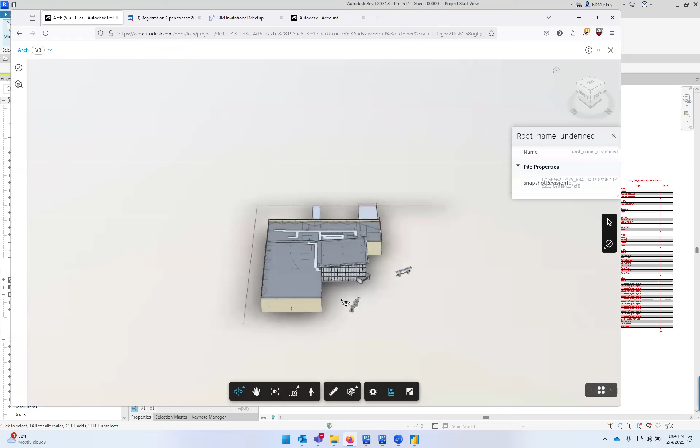If you're in ACC, you can do this. It works really well. You can still see this data exchange model just like any one of your Revit files. But basically what that's doing is parsing that data exchange model down into data, not native Revit content. You can select on it. You can still get the properties. You're going to see all of the properties are still going to be there, etc. But it is a lot more dumbed down version of it.

And the whole reason for this data exchange model is you'll be able to have other people start linking to this. Like theoretically, if you've got the Rhino add-in, Rhino can go in and start looking at certain data from the data exchange model, do what it needs to do and update it. The other thing is that if you do have this data exchange model, there is then a Power BI add-in as well.

So you have to go, I believe, to the Autodesk App Store to get this, but you'll see I have a data exchange tool in my Collaborate tab. All this does is you point to a file, you say generate data exchange model, and it does generate that data exchange model up on the cloud, which I was just showing here, right? So I've done it for two separate buildings. I gave a description so people would understand online what the heck is this just Arch file and this Arch Events file. These are your data exchange.

But you can also then go download a Power BI add-in, and that Power BI will let you link directly into that. So if I go into my get data, it doesn't show up here, but if I say more, I can actually get data from, oh, I got to remember what this was. I did this a while ago. There is like an Autodesk access tool, and you can actually go get it from there. So I got to go to other, I believe. And then in the other, there's your Autodesk data connector for Power BI. So it does allow that. So this is getting directly connected to that.

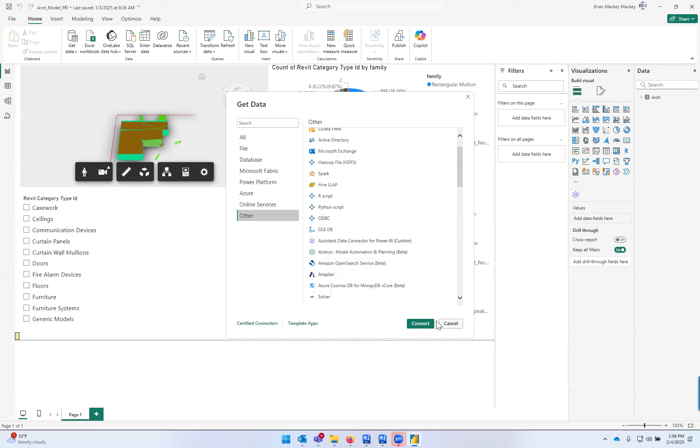So I've used Power BI with Revit stuff in the past. It's usually we're exporting out to some sort of Excel data or whatever. This will actually live link from Autodesk, the Autodesk Construction Cloud. You can kind of see that with the little tip, you've got the little Power BI viewer. I literally spent no time in this. I can click on the casework. It'll zoom me in and show me all the different types of casework, et cetera, we've got going on inside of there. So I'm not going to really get into this, but I did want people to know that this stuff is there.

Autodesk is trying to work on the data exchange models as they keep talking about. And I know they're going to be pushing that even harder in 26 when that does come out. So if this is something you guys are interested in, do go play with Power BI on the Autodesk data exchange models and add-ons, and you'll be able to quickly set some of that up. And again, there's also a Rhino data exchange. If you're using Rhino a lot, there's something to hook up into the Autodesk data exchange as well.

And it looks like Rick also put up there, speaking of Rhino, there is also a content catalog. So if any of you guys are using the content catalog, formerly known as, oh shoot, I just drew blank. I can see all the people's faces. UNIFI, thank you guys. Formerly known as UNIFI, they do actually have a Rhino add-in for that as well. It's still missing a lot of what we had from UNIFI, but they are working to make improvements. So hopefully that'll be sitting in there.

So I think I might have to show something else since we literally only see one question in there. I'll show something I was playing with the other day, which failed miserably, by the way. I have a client and they have all these different profiles to do their curtain wall mullions architecturally. They had one that was just a rectangle, one that had a reveal on the right, one that had a reveal on the left. So they literally kept loading in 3 or 4 different profiles. My theory is, hey, could we have one profile that would do that?

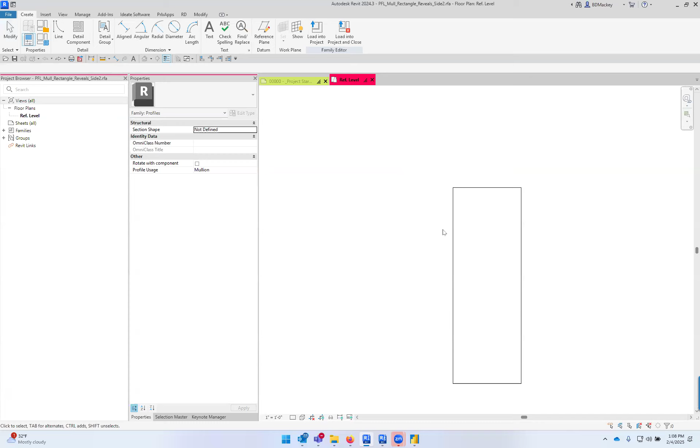So you can kind of see if you start looking inside of here, obviously that's the pretty simple version. But if I came in here and said I wanted that reveal to be 0, I can make the reveal go 0 and it still works. I'm not getting the element is too small on screen. Because technically what I'm doing is I'm drawing 3 separate lines. I've got one really short line there, I've got the line here, and then I've got the overall big line here. I got that for the other side as well.

So if I go into my visibility graphics to just look at this, and again, I don't know if this was a good idea. Well, at the end, I found out it was a bad idea. I don't know if it was a good idea beforehand or not. But when I started going here and doing this, it's getting into just a lot of, hey, when it's 0, I need to make this line come back over to here. But then I also need to make this line up as well, right? So I'm just technically shifting all of those lines over to see what I wanted to do. And again, I'm basically just doing that with formulas.

So if I come out here and look, I'll cancel out of this, I have 2 reference planes on top of each other, right? I can come down here, I got 2 reference planes. One is going to be the reveal reference plane. And then the other reference plane I have is going to be the one that's for the physical right side. So if I come back here and I just say there's going to be a reveal distance here, I change that value, cool, that's what's going to be there. But then the same thing is happening over here. You'll notice right now there's two reference planes on top of each other there. And when I undo that, you can see them.

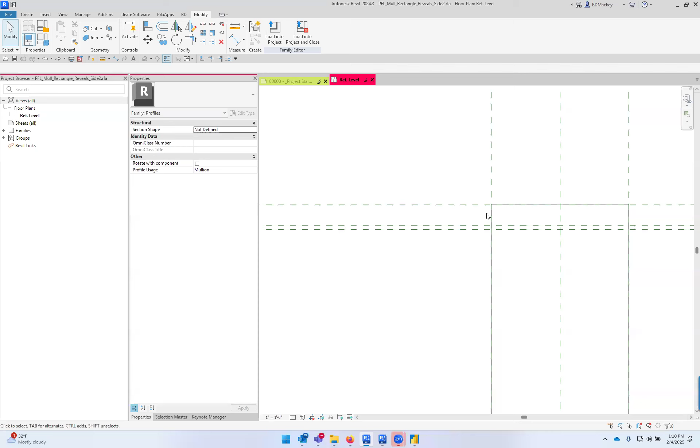So basically what I have is just a conditional statement saying, hey, when this comes over to 0, take these 2 reference planes and shift them a slight distance from each other. Otherwise, if it has a value, let's go ahead and put those on top of each other, right? So technically this line here isn't constrained to this reference plane. This line here, if I were to delete it, wasn't constrained. It's the endpoint of this line that's constrained and the endpoint of this line that's constrained. The other line I have just connects those 2 together.

So you'll see inside of here, like I said, just a whole bunch of conditional statements that's basically saying, cool, if the reveal depth equals 0, make this 1/32 of an inch. So make the gap between here 1/32 of an inch, right? So if I come back up here and make that reveal 0, you'll see that I make this 1/32 of an inch, which is actually plus the reveal depth. So it's reveal depth plus that. So it's basically just giving me 1/32 of an inch, and then this one just shifts over.

If I go change this to be reveal depth plus 1/8 or something like that, then what you'll see is that line. Oh, I got to go make this a value again. Sorry. You'll see that that line is technically just at an angle. So all I'm doing is just making that line go straight, which I thought was brilliant. And it's like, God, this is so cool. But the problem is in Revit, when I loaded this in, I saw a hard-coded face line at all of these. So I did this as my curtain wall mullion.

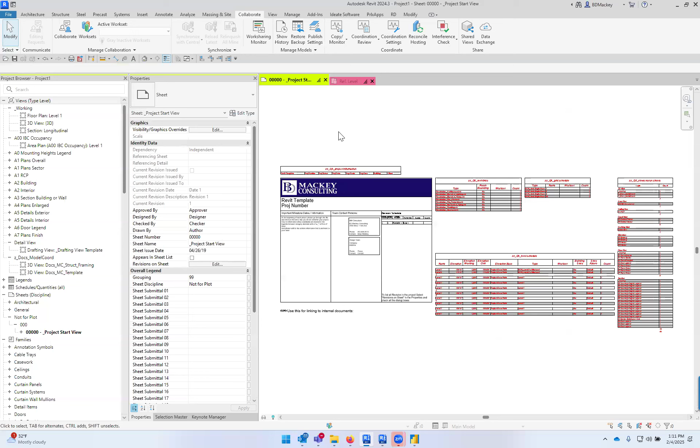I don't think I loaded this into my template. So I'm gonna go ahead and load this into my template and just show you. I'll go to a 3D view.

You also can see that I'm buying time for more questions. We only have a couple of questions here.

But if I come in here and grab this mullion, I'm going to go edit the type, and I'm going to go grab the mullion that says reveals, right? So we'll see what's going to happen. I might have totally broke it. I'll delete them all. Why can't you put them in there? It's not a corner one. Let's just go create a new mullion. I threw this into a client thing. I did not do it into my own yet. So this totally is not curtain wall mullions.

Rectangle. Let me just duplicate this. Cool. R, so I know which one I'm working on. And if I say, cool, this one wants to be the snap cap, the reveal side one. All right, so now I've got an RRR. So if I were to come in here and just grab this one, unpin it, and switch it to be a new one that uses that profile, duplicate, cool. I'll tell this to use. Oh, I already did that. Never mind.

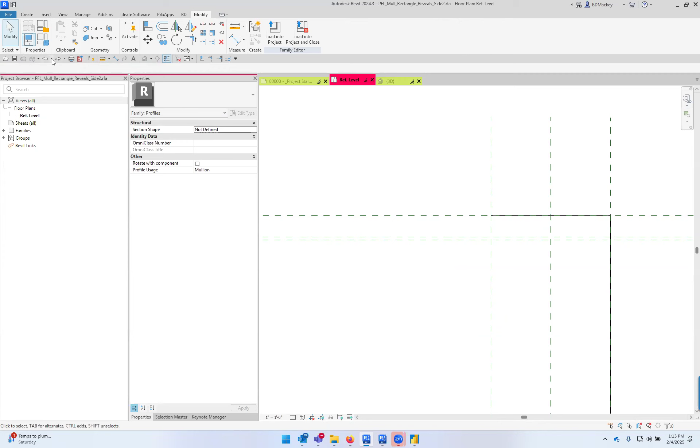Wow, it's broken in my profile. I literally just used this yesterday. Yeah, I'm done with doors. Profiles. R. Maybe I should have undone all of this and reloaded it in because I broke it so many times. Let me just come in here and undo everything. Load that into my project.

Profile mullion, rectangle, side 2. And close this view, go back to my 3D view. We'll grab that. Did I tell it to actually use the right profile? And yeah, it's a good thing this is such a straightforward process, right? Super easy. There's only like one place to check.

Yeah, I love things like this in Revit where this family's nested into that family, which is nested into that family. Yeah. There we go. I have no idea what I did. So this is all fine and dandy. Like this is cool. I got the reveals like I wanted to for this particular client.

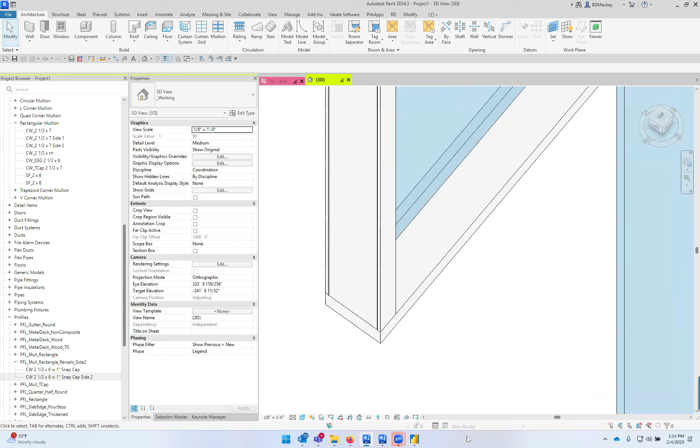But if I go back into that profile and I go down to that profile, I think I said use this one. If I change that value to be 0, it should theoretically work and not break on me. But you'll see that Revit sees all of those faces. So I had the one with a reveal on either side, and I just made it rectangular. And I brought it in, and it added all of these lines all over the place. So even though it's one flat surface, Revit's still giving me the hard-coded line between all of those surfaces. So unfortunately, my idea didn't work.

But I did bring it up because if you did want to do that, I'm sure if I put that profile and I used it like on a handrail, it would probably show as a rectangle. I don't think on a lot of the other profiles where we would sweep that, I would see all of those different faces.

The other thought it did give me too, though, is if you really wanted to bring a profile in and have different materials on those, oops, Control Y, not this, I could then probably have different materials on that profile if I really wanted to. Since they're different surfaces, it might give you another option. Not at all what I was going for, but just the capability.

So what I was trying to do on that is just let my client know that, look, you can have one profile do multiple things. In this particular case, it failed miserably.

All right, we'll have questions. If you guys don't ask any more questions, we're just gonna have to sit here and watch me fumble on finding all the properties for all the mullions in the 12 locations they are. So what have we got going on? Well, there was some chat about iRevit getting updated. Yeah, I started with that. That's true. Sorry.

Michael asked, can you put them 1/128th of an inch apart? No, because then in Revit, I'd get something that was smaller than a 32nd of an inch and it would blow up. So I do have that at a 32nd of an inch, and I could have had this one come over a 32nd of an inch. It had 3 lines on the edge. Regardless, I think it just failed miserably because it's got to be there. So a little frustrating.

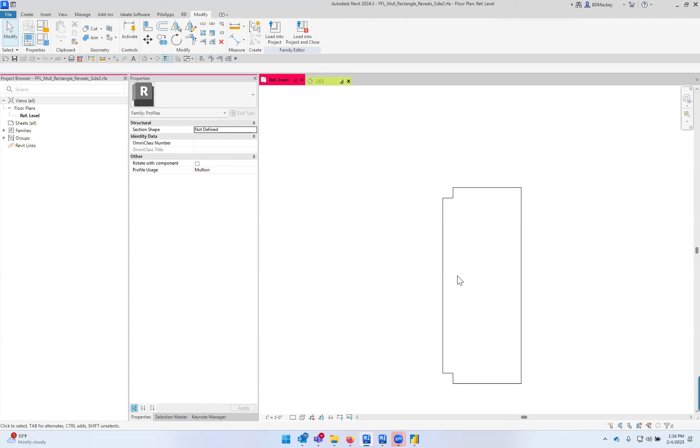So if that was something you wanted, I think John actually made it look like the maze from The Shining and loaded that into a mullion. And he had every mullion look like the Shining maze. So just one of those things that it is possible. Not the thing I went for, but there you go.

So no, Michael, I don't think making that 1/128th of an inch would work. Yes, you have three edges on top of each other, but Revit needs that profile line segment to be at least 1/32 of an inch.

Rick's asking if I played with the new feature for the mullion profiles. No, I haven't. I don't know if I ever will. I don't think I need to add 5,000 different faces on my project just to get that look.

Way back when, if anybody used the out of the box old mullion profile or old mullions in one of the templates, the mullions that they created actually nested a detail component into that profile. So the profile had the profile lines. I don't know, do they still have that profile, I wonder, in the out of the box content? Let's go to profiles and find out.

Probably. Do they ever get rid of anything in there? Well, they did the doors when they did the doors a while ago. Let's say profiles,

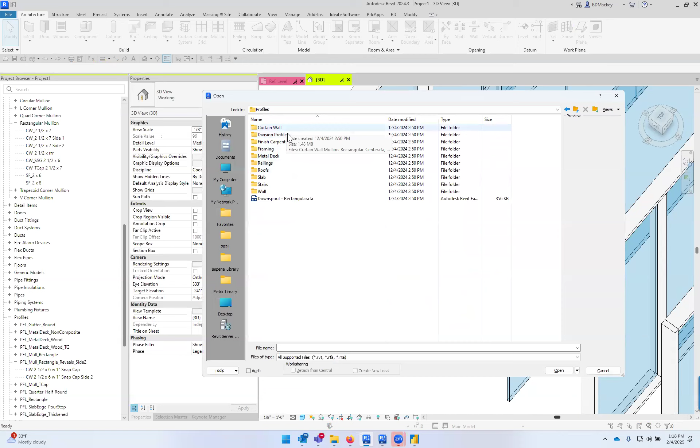curtain wall mullion. Yeah. So in these ones, if you actually open up theirs, they nested in the detail components. So this is a detail component nested on top of just the profile lines. That nested detail component will show through. It's not shared or anything. It's just a detail component that's loaded into it.

Granted, I'm talking probably 10, 15 years ago, but I had a client who loved this. And so they did this. And then when they loaded it into their project, they noticed their project was massively slower, right? Because if I add a horizontal grid segment to this wall, I don't end up with one mullion, I end up with two mullions here. This is not one continuous bottom mullion. Between every grid segment, there is a new mullion.

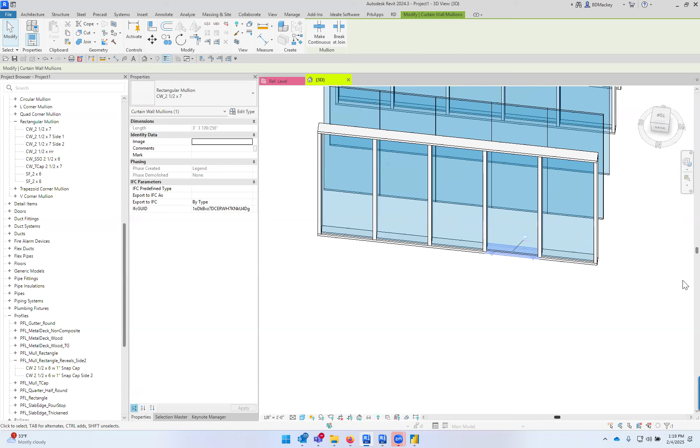So now that detail component is in not once, but one, two, three, four, five times at the top, five times at the bottom, and then however many vertical segments you have. The other thing with the detail component, it looks like somebody posted that, is you do have to be perpendicular to it. So if your profile was rotated or you're doing a slanting wall, the detail component nesting kind of didn't work.

So for me, I never did that because, like I said, I had a client do it and we did a mullion calculation. They had like 9,000 mullions. So you're putting that detail component in 9,000 times. Where are we seeing it? And he showed me the 10 views he saw it in.

I'm like, take that detail component and put it in the 10 damn views where you want to see it. Because you're not seeing it at an 1/8 inch scale floor plan. You're not seeing it at a freaking 1/4 inch scale floor plan. You're only seeing it when you get into like 3/4 of an inch where you're detailing. So I will have that same theory on the curtain wall mullions. I'm probably never going to get into that.

Plus, in my mind, I'm not a fabricator. Getting into that level of detail, the contractor is going to switch me out from Kawneer to somebody else anyway. I don't think I need to be that specific on a curtain wall mullion. I need to give you the gist of it, but I don't think I need to show you the exact extrusions. Maybe you want to, that's up to you guys, but I don't want that overhead in my building for the benefit it doesn't really give us.

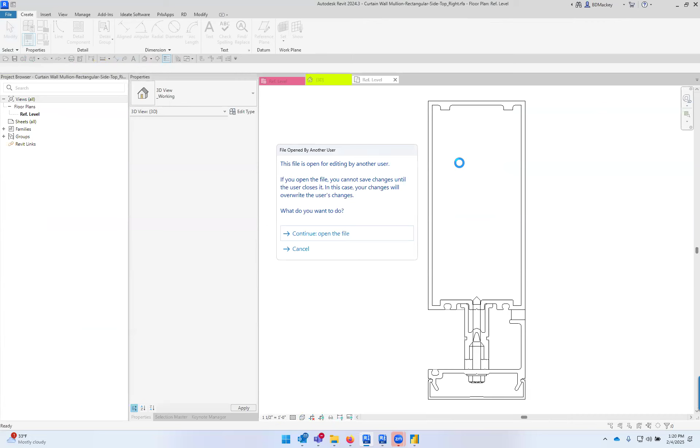Yeah. Somebody said your detail component has to be parametric as well, so you can nest the width and the depth and everything. Absolutely, you'd have to do that as well. And the out of the box one, if I open that one again, literally is. You change the sizes, it all updates. So this whole detail component is 100%. If I say this mullion wanted to be 2.5 by 10.5, it all updates.

It's all there. If I go change the properties, I don't even think they gave you a width property on this, because they didn't want to attempt to figure out all these little things. Depth-wise, that's easy. So yeah, it gets a little bit crazy. But again, my point is now you're seeing it on every floor plan, and are you really gaining anything? Yes, I could turn it on and off by detail level, medium and fine, but it's still there and it's still being used in the Revit workflow.

So no, I haven't messed with the profiles for extrusions. Where I technically really would love that, I would actually love that for handrails. More often than not, I'm cutting through handrail and I want to show that that handrail is an HSS tube or something like that, or my stair channels, I want it to look correct. I would probably use it more there because I'm not doing it so many times rather than getting into all

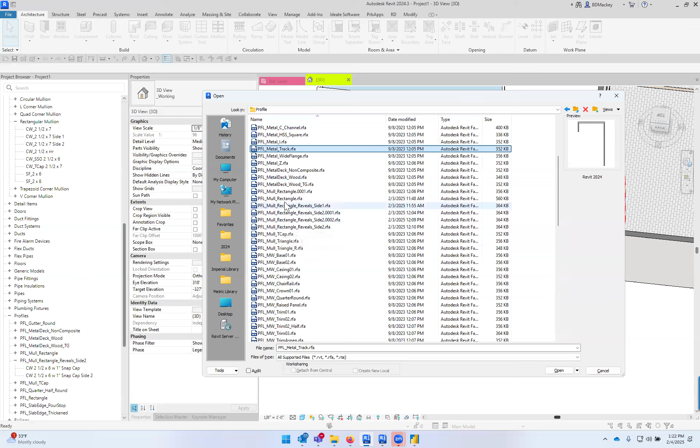of the other things. Like for me, I have a metal profile in here. Where's my metal profile? I don't remember which one it was. HSS, right? So kind of on Michael's question now. So this is my profile where somebody's like, no, I needed to see this extruded out as an HSS. I have a 32nd of an inch, maybe a 64th of an inch gap because there's not a line here that I use on handrails.

So yeah, if you look up underneath the handrail, you see the seam and the metal. But this client does a lot of industrial handrails and they're like, no, I need to see the HSS as an HSS. So they have two little extra lines in here. It is what it is, but that's what I've had to do.

So I would love to be able to see profiles within profile or double lines within profiles for other things than simply just mullion. So if I could come over here and be like, yes, my railings could have that, I would be super excited about that as well. But unfortunately, in 25, it is only mullions.

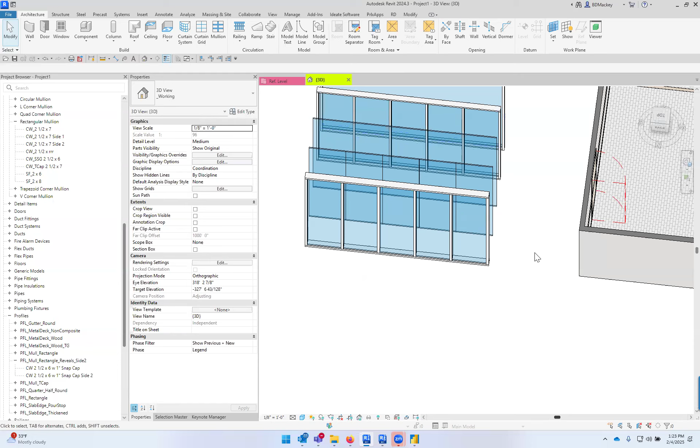Cool. So what questions do we have, Melissa? Looks like we have a couple for doors. So we'll start with Rick. Rick says, how do you set the room calculation point in a door family to be the center of the closed door panel? Is that possible?

I personally do not use the room calculation points on doors. I've used them on other families. I do not use them on doors. And there's a reason why I don't use them on doors, because they truly pick up on the flip. So if you've never noticed it, in a family, you've got this value here called room calculation point. And when you turn that on for a door, it'll give you like a to room and a from room.

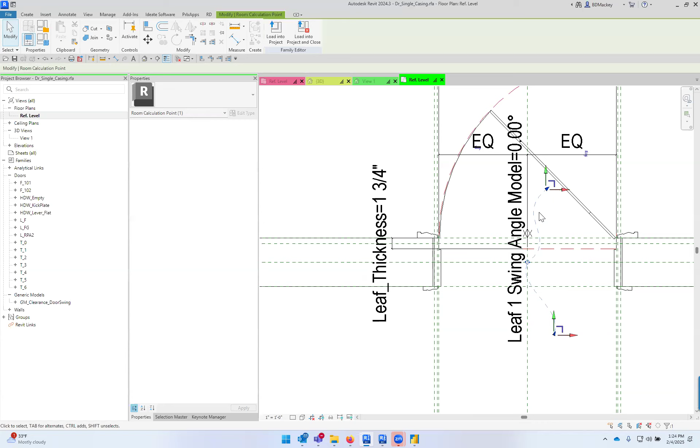So it gives you a squiggle where you've got this squiggle on one side here. This is going to be the from room. And on this side, it's going to be the to room, right? So when you start looking at this, this is what you're going to see inside of this. The reason why I don't use this is if you ever show the to room and from room on a schedule and you wanted to see that data, and you flip that data in a schedule, it will flip the swing of the door on you.

And where I use an example on this is janitor's closets, right? Most of our doors are going to be swinging into the room, but not a janitor's closet. A janitor's closet, we swing that out into the corridor. So if you have a schedule that says my from room or my to room is going to be the corridor into the janitor's closet, and you flip that in the schedule, if you have the room calculation point turned on, it will flip the swing of your door or the hand of your door for you.

So for me, that is not negotiable at all. I do not do that. I do not use this room calculation point. Somebody asked, can you get it to the center of the door when it's closed? I think technically it has to be on the outside side of the host. Because if you try doing it when the door was closed, that's technically going to be within your wall, and Revit's not going to see that as a calculation or a room that you can get into.

So yeah, I don't know if you'd be able to do that because now technically you're within your host. So I could be incorrect in that because, like I said, I don't use it. Rick, if you've seen anything other, then you absolutely could do that. But I don't know because again, if it was when the door was closed, then the door is closed within the wall, and Revit's going to see that wall host as the object. I think that value would just be blank. It could be incorrect though.

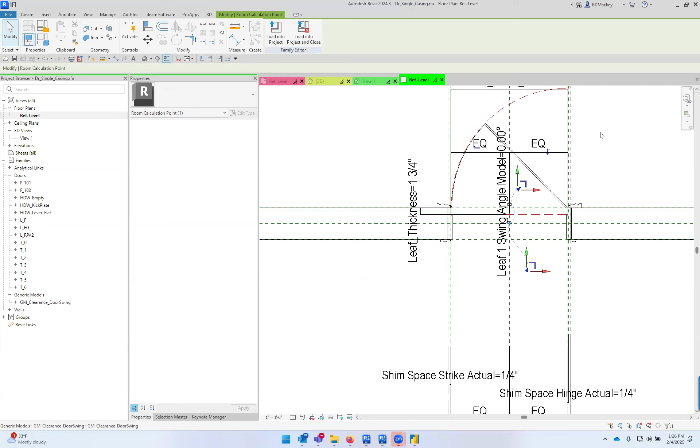It looks like Rick has a follow-up. Oh, I get it, Caitlin. So in a schedule, you're not actually using the room, you're using the door number that says, hey, this is the room it's coming to. Got it. Yeah. So again, that's a schedule that's going through, but you're obviously probably not using the from room to room or the room calculation point, as it's called.

No, I've absolutely used this. I recently had a client, they created a trash enclosure that's nested into the wall, but it kept scheduling it as the room it was in, not the corridor or whatever it was. So we just toggled on the room calculation point, dragged that in front of it, and set it up that way. And that way they were able to say, cool, it's always going to be on the front side of this trash enclosure. So yes, it works great in scenarios like that.

The other thing that I don't know if a lot of people know, and I've got to remember where I have this family, is technically Revit actually looks... no, it's not this one. I don't think it's this one. No, it is this one. So Revit technically looks for the room calculation point. If you don't have the room calculation point turned on, and Revit's looking at what room this element is put into, Revit is looking at the insertion point.

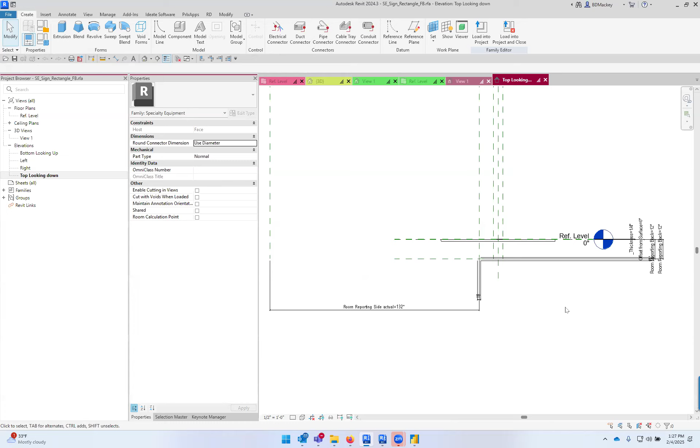So what's great about that is if you have a face-based family, it is always going to host on the face of the object. In this case, this is face-based, but if you have a wall-based one, it's going to look at the wall as the host. But what you can do is move the insertion point that defines origin around. So for me, I have this face-based family. I put it on there, it's going to go on the face of the wall. But then I have instance-based values to move the insertion point left, right, and back wherever I want.

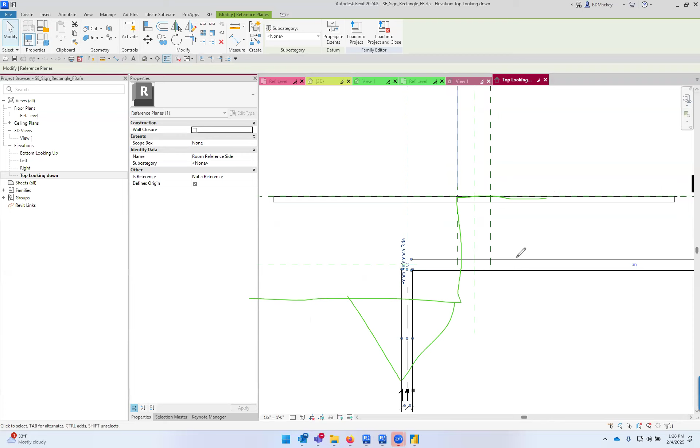Because in this case, like for signage, I might be looking at, hey, this is a corridor, the door's here and it's coming down like this, and the door's over here. Here's my door swing, and I want it to pick up on this room back here. If I did a room calculation point, I'd have to have that dragged, and you can't adjust that in the project environment. So I can move my little reference planes around in plan and get those where I want them to be. And the sign will then say, cool, whatever room this insertion point is set to, it will use that.

So yes, I have a face-based family where I can come in here and move the insertion point around. I put it on the wall, I've got instance-based properties, I drag this around, and now I can move that to where I want it to be. I'm not using the room calculation point because that's static and we can't move it. That's the other reason I don't often use that tool: in this case, I want it back 4 feet, in this case back 2 feet, in this case on the other side. I can do all of that with this scenario.

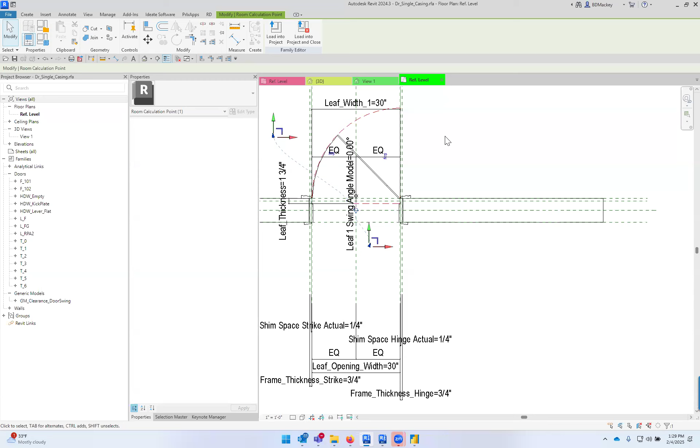Yeah. I was waiting for someone to say that, Sarah. AutoCAD Architecture had this room calculation point, but once you loaded the project, you could just drag it around. It gave you a little grip to drag it wherever you wanted. That was the theory when Autodesk gave us this, because everybody from AutoCAD Architecture was complaining that this is stupid. So they gave us this, and you can move it around as much as you want here, but damn it, I want this grip in the project environment. If Autodesk would give me that, I would use that tool more often. So it's very frustrating. That's fair.

So Rick, I don't think so.

Hopefully that would get you that. Oh no, he followed up. What's Rick's follow-up on that? Follow-up is trying to get the room to go into the door jamb and opening for finish floors. Is there another way? There's no way to... Oh, you want the room to go into the jamb?

Yeah, no, there's not going to be, to my knowledge, a way to get the room to go in and calculate that extra square footage or whatever you're looking for, because doors are not a room-based object. So you're not going to be able to get the room to come into here to see what you're looking for. What I have done, my tile wall is going through here. I don't know why, but let's just delete that wall real quick.

So for me and my doors to kind of help you for finished floors, my finished floor here, if you look at my doors, or if I go edit the sketch of my finished floor, it does go to the center line of that door. I just simply built into my door family a reference plane. And you'll see if I kind of grab the line here. I built a reference plane in there that I call my floor material transition. So when I'm trying to sketch this up, I can align it to that reference plane that goes to the center of the door, right?

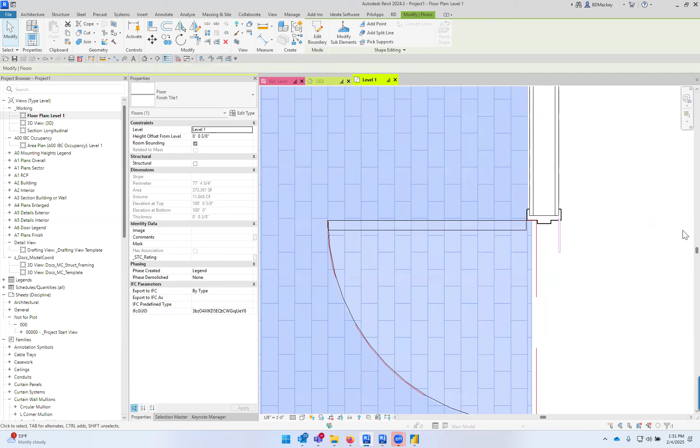So again, if I edit this door family and I go look at the door family here, and I go into my floor plan view, I literally just have a reference plane centered on the door. I labeled it, made it a weak reference, and it's called my floor material transition. There is literally just a dimension for leaf thickness half that goes from where the front of the leaf would go back here, and now I have that for setting it up. So it's the best solution I have for you, Rick, to have a place to snap your finished floors to.

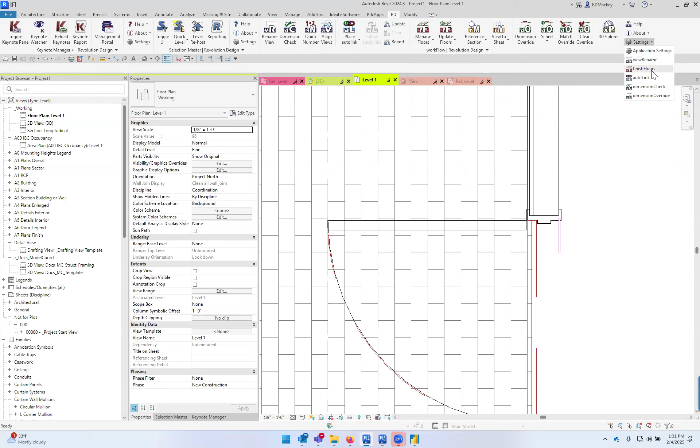I will say that in the project environment, Revolution Design does have in their Manage Floors, so you can actually create floors based off of the room. When you do that, there is a setting for the finished floors, and I got to remember where this is. I haven't looked lately. Oh, it's the pictures at the bottom. So you can have it extend into the face of the frame, so it will pick up theoretically on what's going like this.

So ignore the whole door, which is what Autodesk would do. Go to the face of the frame or try to notch it into the center of the frame. It does go to center of frame, not center of where your leaf type is. So not exactly perfect, but definitely better off than what you would get just trying to do floor by the room itself. So they do have this. If you are using the Revolution Design tools, they'll go through and do that.

I have had a long time request from Autodesk. I don't know if you guys have ever done this, but if you select a reference plane, there is a tick box for reference planes to be what's called a wall closure. And the wall closure tick box, if I go change my values to have something, it's up here. I'll make these 2 inches. So this here has a tick box for wall closure, right? What this actually allows us to do is any material within that wall that has a wrap built into it will wrap around to a reference plane that has the wall closure ticked.

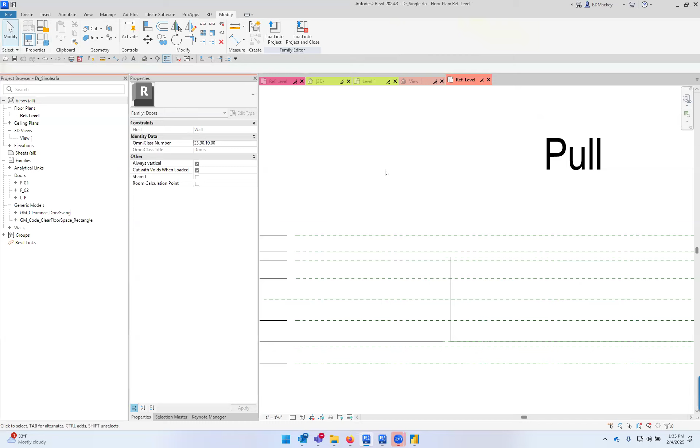I would love to have one that's called floor closure. So I could grab this one here, have a floor closure tick over here, and then my finished floor would go into the opening like that, right? So again, that wall closure, if I come back over here, and I think I got an inset door over here. No, it's not. We'll switch it to be an inset door. Sure, that'll work. Right, and then if I go change my inset here, you can see that I've got this finished material here.

If I go into this door, I can go into the door and say, cool, where is it? For the wall closure, do you want it to pick up on what the host is telling it to do, or do you want it to come on the interior or the exterior?

So if I were to come in here and change that material return to be 2 inches, not 2 feet, 2 inches and 2 inches here, and now when I go into this wall type and say, at the wraps here, I can allow this and this to wrap, then it'll wrap to that wall closure checkbox. So I can get those materials to wrap into that wall closure when I go in and set it up.

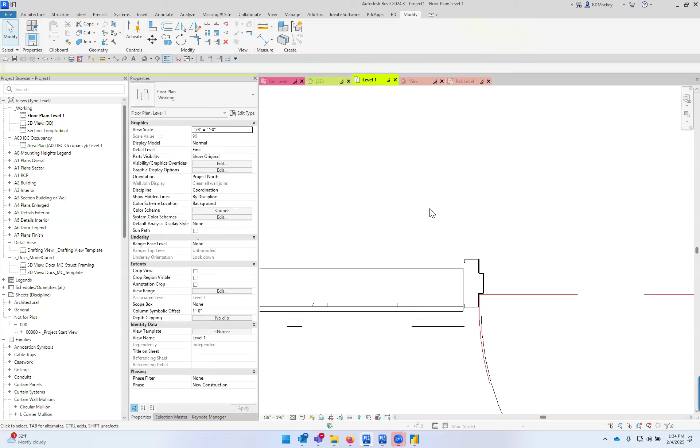So you do have that in your doors for your little wraps. I know those wraps are fake and they're not real, but if somebody does want to see it, you have that as well. So I just wish we had a floor closure checkbox. That would be great. Yeah, roadmap.

So at the very least, build in a reference plane that's called floor transition. Your users can at least snap to where you want that floor transition to go to. That's all I got. I didn't align and lock mine to it. I guess I could have aligned and locked that finished floor to it, but see if I aligned it to my, see, and I always make sure I'm saying it because there's so many reference planes in everything now.

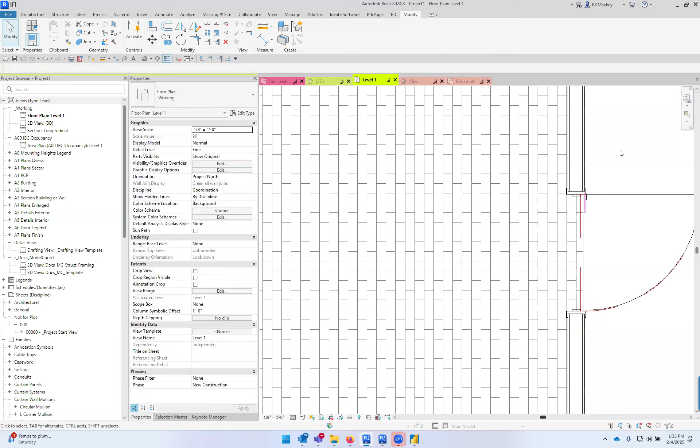Floor material transition, if I align and lock that, I don't do the alignment and lock, finish that. If I flip, no, don't attach. If I flip my door, does the material go to? Yeah, so you could even do that. And if the door flips, woo, your material will go with it. So that's all I got for you.

No way to actually get that to work inside of there. Trying to figure out where that's going to come back and bite you in the ass. The align and lock, yeah, I would never do that. Yeah. Like, who is that going to just totally have pulling their hair out?

That's okay. One of my clients who does more industrial type work, they know that all of their buildings have a concrete curb, right? So almost all of their walls are built up on a concrete curb. There's usually a 6 inch tall concrete curb wall here. But then the concrete gets poured over it. So whenever there's a door, we need to have the void go down 5 inches into the wall that comes up. So we've got to rebuild their doors to have a void built into it to also cut the wall below. So that one's going to be fun to go in and do too.

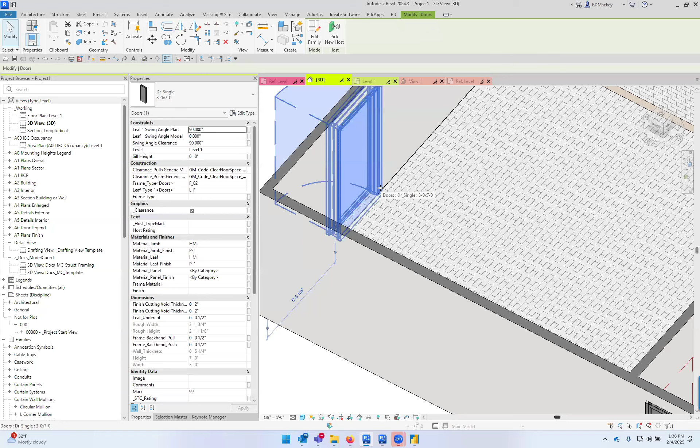So cool. Good times. Oh, so Rick's saying BIM 42 as a finished floor tool does the same thing. One thing about the Revolution Design tool as well is if your room changes or your walls change, this is going to be static. Like if I move my door, that transition is going to be static, unless I aligned and locked it to the edge. I must have actually aligned it to the sides as well. But if you didn't do that, then it's not going to update.

But the update floors basically says, cool, update the floor. It'll see that the rooms have changed. It'll go through and do it all because it is using the rooms, so all of these lines are static. I used pick walls for all of my lines. So if I move the wall, it's all going to be just fine. Oh, I didn't use pick lines. But again, if I use Revolution Design Tool here and there's a room, then I could just say, go update the floors and it would make that match.

That's hilarious. That's where it's going to bite me, Melissa. I am. Already figured it out for you. Perfect. That's funny.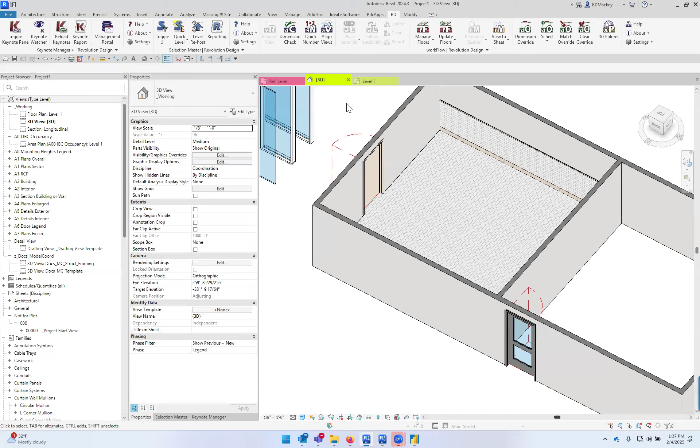All right. Oh, here's a graphic door and window schedule question. You walk through your method to do graphic door and window schedules not using legends. Do you do this for wall types as well? So the way my doors are built, I physically cannot do a legend component.

I found out when I created my doors a long time ago, not because I was using it, because I hate legend components, but if you have a family that has the tick box for work plane based, and you load that into Revit and try to use it as a legend component, it does not understand what the hell is going on. So if I open up a legend, I'm going to come in here, go to annotate, and do a legend component.

And I'm going to go choose one of my doors. It'll be one of my L's. Past the casework, since we've got this beautiful, you can actually do, I do a leaf type, right? So leaf type's coming in here and it's on a floor plan. I'm like, cool, I want to see the front elevation. Nope. If it is work plane based, the front and the back, it doesn't even give you left or right. You only get front and back.

And then for whatever reason, it sees it incorrectly. I have found that PyRevit, which I don't have installed, does have a thing to say, no, let me force all the legend components to look at a particular view. It will fix that. But the way my doors are built, even though the front and the back is correct, since it's ticked on work plane based, and I've tried this with other families that are the same way, it just freaks out and doesn't give you all the options.

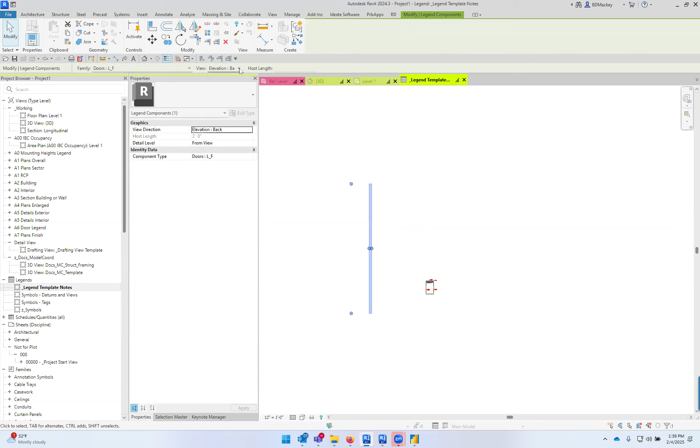Right. So I can't even come in and be like, no, I want to change it after the fact. It is just not there. So I can't do that with those components. So for me, and I know there's different ways of doing this. Some of my clients do a design option, some of them do a work set, some of them do whatever. I have my stuff on a phase.

So if you go in here, you're going to see that all of this stuff, if I select it, is on a phase called the legend phase. So I've literally created all of this stuff in my template on the legend phase. If I go say I want to go see show new, all of that stuff over here goes away, with the exception of that detail component, right? So if I say I'm on a legend phase, that's what happens here.

So I've created a legend phase. I have other clients call it annotation. I've had clients do this as a design option, and they do it that way. I personally do it on a phase because A, I can have it in template, and B, then it doesn't necessarily see these walls for room bounding elements because it's on a phase after any phase I do.

I also have that phase for me at the very end. So my legend phase is the last phase. I have other clients like, no, no, no, I do it as the first phase. Doesn't matter, whatever you want to do. But then what I've got done is I literally have placed all of these crazy doors, not only for me to have a record of it, but more because that's how my legends are created.

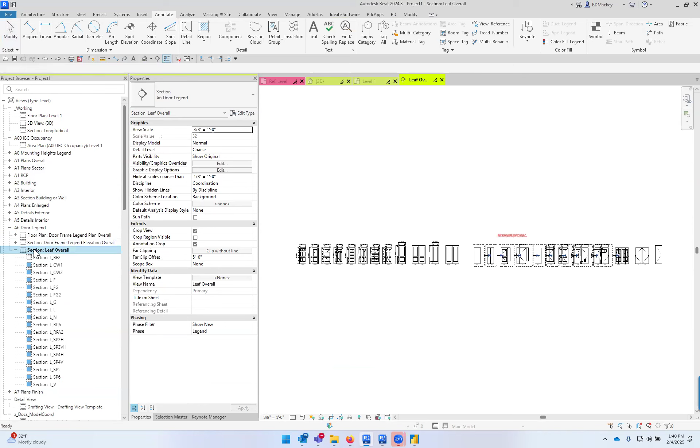So if I come down here to my door legends, you're going to see I've got a floor plan for the frames. I've got a floor plan for the leaves. And then within, sorry, it's an elevation, in this case a section for the leaves. And within that, I have all dependent views. So I did one overall view, then I did all of these dependent views for each leaf.

The reason why I do that is if I go into one of those dependent views, then I have all of the text inside, all the dimensions inside of here, and this is a tag. So this is truly a tag. So if I were to go grab this, and I'm not grabbing this leaf type, you can see I'm grabbing the entire door, right? I can go to that door and be like, oh no, I shouldn't have that leaf type. I should have had this leaf type.

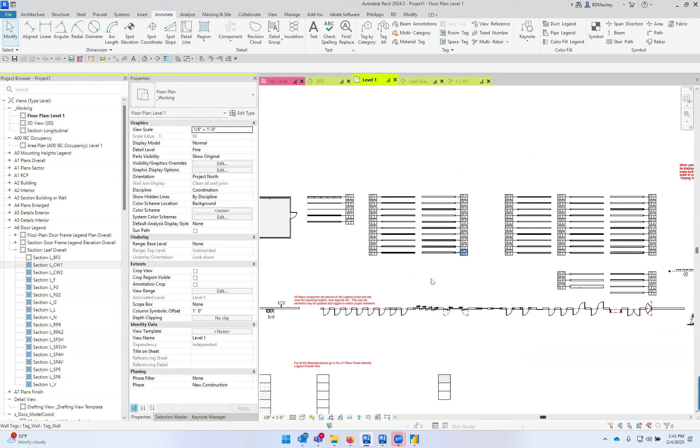That wasn't a leaf type. I'll go to CW2. I go to this leaf type, gonna have to remove a couple dimensions. Then you'll start to see, cool, now I've got this correct tag down here, right? So again, in my overall building, I went through and placed a fake wall, and then I've got all of these different doors inside of here, and then I'm doing views to look at that.

I also went in personally for me, and I did a frame legend because those are the same things. So this is my frame type 40. My frame type 40 is going to allow me to come in here and start saying, cool, I can now throw all of those dimensions on here. And not only do I have a frame legend for the elevation for what is frame 40, I have that same for a plan, because why not do it for a plan, right?

And if I actually go look at the sheet where all of this is, and I open that sheet, I also have a frame schedule, which talks about here's all my frame types. Here's the hinge, the strike, the head thickness in case they happen to be different. Here's the depth of the wall, so the host depth. Here's my actual depth of the frame itself.

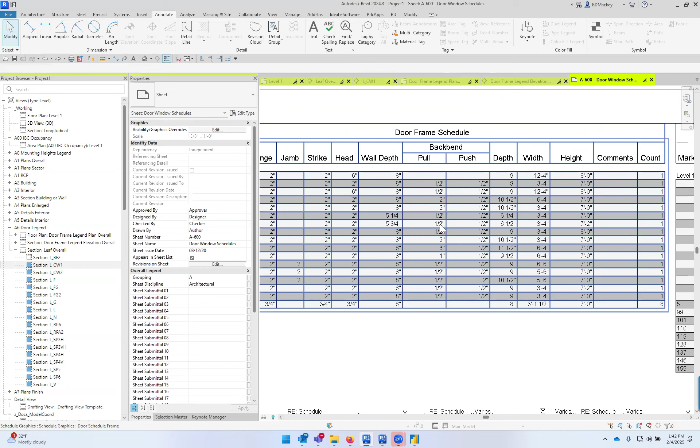And if I have a back bend on those, if the back bends happen to vary, so like in this one door, it's got a 2-inch back bend versus a 1/2 inch on the other side. So I've got all those frame types listed. And then my schedule says, see the back bend values. And I've got back bend values on this. So on my schedule, I put the door schedule with my frame types and my leaf types so you can see how many of all of those there are.

And that's just what I go through and do. So it's all live data. It's all there. There's no legend component. And now I can see, cool, I've got all the properties of this here. So my contractor, my fabricator doesn't have to try to go to every floor plan to see what are the variances of all of this. This is all live data to my doors.

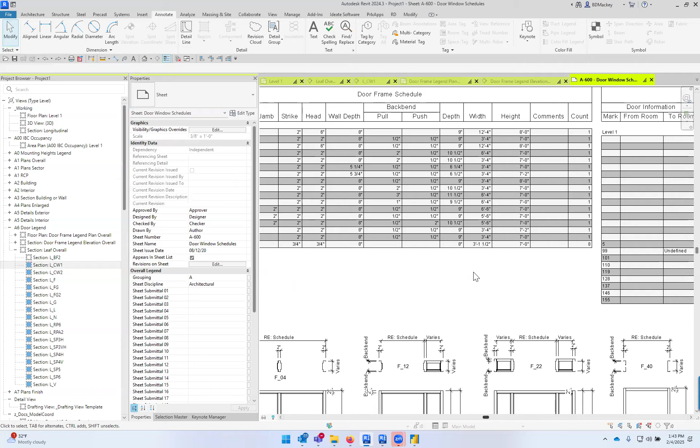So that's my theory. I know you guys do something similar at Parallax. Yep. Our legends are before the project. Yeah, you do a phase before? Yeah, we do a phase before, and there actually is a demo phase just so you can use it for live legends to show overrides and things as well. Yeah. But yeah, they're all floating out on the legends level, pre-construction, I guess.

What is my door family based on since those are all instances? Frame type or just door? So for me, my doors, the types are sizes. And most of these are like just door single. The frame as well as the leaf in all of my doors are instance based. Same thing for all the materials. Those are all instance based. And then even things for like the back bend. So like you can see on this door, there's a 2-inch back bend on this side, right?

I'm actually just playing with this. I literally just added the back bend like last week because I had a client go, well, we always schedule that. I'm like, you're the only client I've ever gotten that schedules what those are. So yes, I just switched. That was built into my door. I just had to make it shared parameters so I could schedule it. Those were all in there. But so all of that stuff is instance.

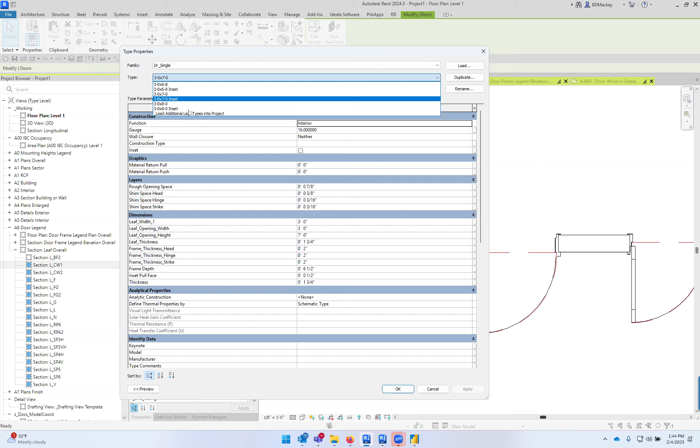What is type based for me is going to be the sizes or like the shim space or the frame sizes. So the size of the frame head and strike, those are all types. So if I have like a 3.0 by 7.0 that's inset and I got one going into like a CMU where I want a 4-inch head versus a 2-inch head, I would duplicate those as I go into those. So those are the types of scenarios I have.

My single door also has a tick box for inset or not. So if I tick it inset in a single door case, then it ignores the wall width and it goes to the frame depth value, and that frame depth just starts going inside of there. So I didn't want to have one door that does this and another door that looks at the other one. That's all one door. All of my door singles are one door single.

I do then have the ones with the side light. So this is a door single with side lights. The 1 versus 2 side lights, those are frame types. So if I switch this one from frame 22 to frame, I think it's 12, then the one side light is going to go away. I got to remove all my dimensions that are dimensioning it. Yes, I know. And now I get to the single side light. So for me, those are part of the frame types.

Same thing for my pocket doors. They're over here. So like my barn door can also be a pocket door. So again, there's just the tick box in the type properties for is this going to be inset? If I say inset, my barn door becomes a pocket door. But I do then have to go back and change the frame type. So I probably on this one should have made that be something different. And that would be like a frame 12, I think.

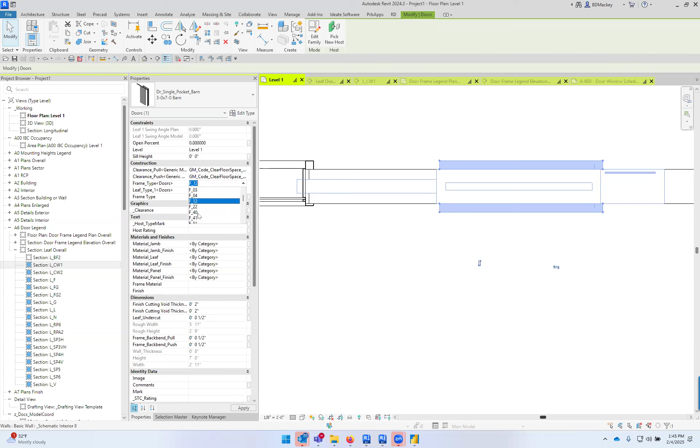Yeah, I shouldn't be doing this in my legend doors. No, not frame 12. Probably frame 40. Yeah. So then there's my frame 40 to show the pocket door.

And then if it's more of a residential type door, we get over to the residential doors. These ones also then have trim types. So you'll see I've got trim types on the pull and the push side. And then my residential doors also have hardware in the pull and push. I just haven't implemented the hardware on the commercial doors yet. So Blacker.

Yeah, when Tom's saying the guys who actually schedule the finishes on the backbends on these doors, it's hilarious to me because I have most architects who don't schedule that, and so many architects have like a chair rail or something out here and it's proud of the door, and like, oh shit, it's an RFI later. This client's like, no, whatever finishes we have, we've got to take that into consideration for every door, and that's why they started scheduling it.

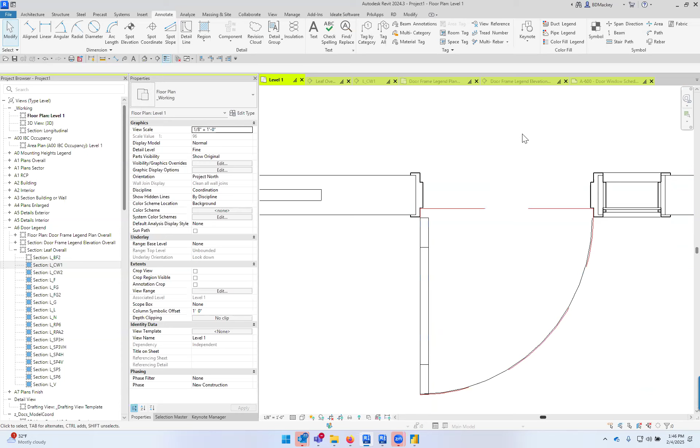I always laugh because when I see architects, most of them have the door head and jamb detail, and they have one detail. I was in a project where there was chair rail going on, a wainscot going up. That one door should have 5 jamb details. What is that jamb detail at the base? How are you returning it? What is it at the panel? What is it at the chair rail? What is it at the fabric panel above? Right. So this one door should have 5 different details. They did not do that, and their job suffered from it.

So this one client is very in tune with the interiors. No, we look at every single finish we put on the inside at every single door, and that's why we're looking at those backbend values.

Nice. So for all of this stuff for the legend phase, I even have all of my mounting heights because then they can be live to something. So all my mounting heights are actual families I've put in there. I think those are on my A7. No, those are on my A0. So again, same thing here. I've got a mounting height overall. All of these are then dependent views, and it has all the dimensions.

And part of the reason why I do this is if you're like, cool, in this project I'm not using this toilet paper dispenser, right? I can find that toilet paper dispenser in my families. So I come down into my families, those are specialty equipment. And I wanted to swap out this toilet paper to something else. That's paper towel, but you get the point. If you do a reload and choose a new one, it will just update all of them in your project. So I don't go load a new one when something changes in a project.

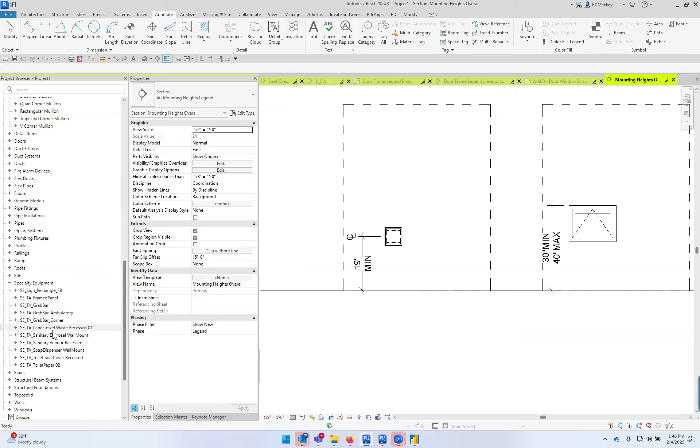I do a reload from, and as long as the family I swap it out with has the same is reference, called is reference centerline elevation, this dimension will stay. As long as this one has the is reference on the reference plane at the top, this dimension will stay. So as I swap all of these out, my dimensions stay, but I'm truly showing the elements I'm using in my project, not some dumb variation of it. So I do that for all of my mounting heights.

They're all live things. And then I do it for turning radiuses and things like that. I think this one even has the handicap clearances, all of those sorts of things. So doors, windows. And then the last thing I have on there is a material legend. These are little generic annotation families, literally just 1/4 inch thick, I think 4 foot by 6 foot or something like that. And those are literally in there for my finishes.

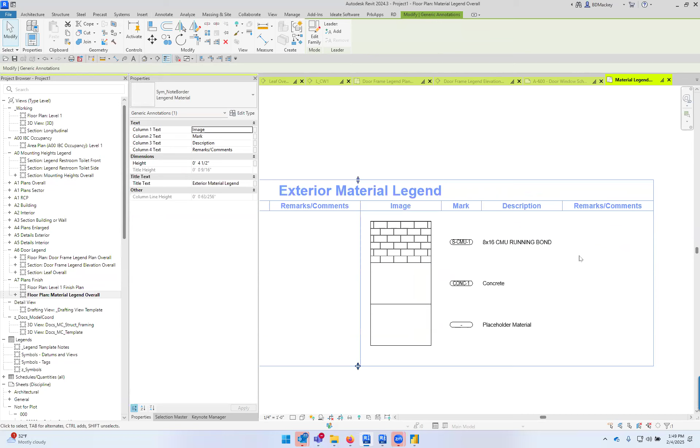Because again, if I come down here to this finish, I model all of these elements, and then this is a tag tagging the material. So this is my material tag tagging this element. It's a little border that lines up with all of this stuff. So if you're like, cool, on my exterior material legend, I wanted to come in here and this needed to be, that's not the button I meant to click.

This needed to be whatever material, acoustical ceiling tile in the exterior building. When I swap it, the tag picks up all the data. And then my finish schedule is truly finishing that and doing that as well. So my material legend has data to it, and then my actual schedule is truly scheduling all of those finishes.

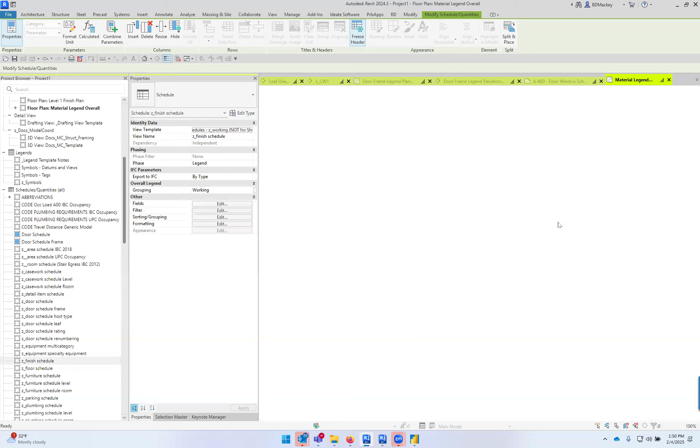I don't know if I actually have this in here because all my clients do their finish schedules different. Let's see. Right, I have a working version of it. Then I'm pulling out the description, the fabric, the model, all of this stuff. And all of that data you see back on the other one is what is going to be in the finish schedule too. So this is my legend accompanied by an actual physical finish schedule. And then again, dependent views for this, so I can have one that's just interior finishes, one that's just exterior finishes, and you put those on the appropriate sheets.

So a little bit more than just doors, windows, things like that. In honest truth, my window library is lacking. I don't really have a great window library. I debated doing the same thing with cabinets, because all my cabinets are fairly detailed, with the exception of shelf holes, which I don't have modeled in them. I could do detail components nested with the exception of that. They're all pretty much modeled fairly accurately as well, so I probably could do all my details through there too.

So again, that's just all over here to the left of my project in a phase that most people will never see, because when they get to their projects, it's only seeing the phase they're looking at. So the only reason, Melissa, I don't do it before, and I know you could put the phase to, right? You create it and demo it on the same phase. If it's after, you don't ever see it as long as you're on show new. The previous never comes into play. That's the only reason I did mine after: I kept having clients, when I originally did it as the first phase, say, oh, but when I say show previous, I'm seeing it. It's like, oh my God. But if it's after, they just never see it.

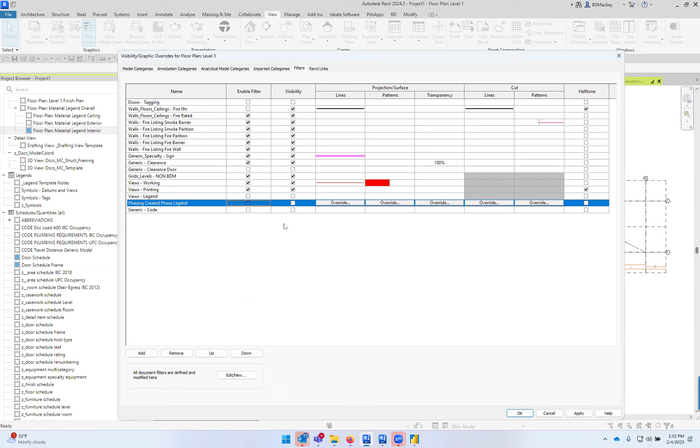And now with actual phase filters, I believe I created one called phasing legend, right? So all these components whose phase created is legend. Now I even go into all of those view templates and I have my filter in there for my phasing legend. And then I literally just have it all turned off. So not only is it being turned off because of my phase filters, I can turn that all off via view filter as well, when they added that in like 22 or 23. Nice, a nice belt and suspenders. Yep. So that way nobody can really screw it up, because even if they say my phase filter is none, they are not going to see that stuff because there's a view filter also turning it off.

I was just looking at the comments. I was reading Caitlin's comment.

Yeah, and that's also, Caitlin, why I put mine at the end, for phase mapping. When consultants were getting it, it was confusing the crap out of them: so what's this legend phase, and do I need to map that to my existing? If it's after, nobody ever cared. It was really bizarre. Just moving my phase back made my consultants less confused. Match your existing to existing, match your new to new, we're done. Otherwise it's, well, what's this other phase? What do I do? Oh my God, it's before it. So the big thing for me is anytime I get into phases, I always make sure legend is at the end and I make sure people insert phases before that.

Yeah, most people use existing and new construction, and that's pretty much it. Yeah, even if you rename it, you get people all confused.

Oh, let's see. Rick is saying, using your opening family, love it, by the way. Pause for you to thank him for thanking you. I have an opening that is running right up to a corner of two walls. So a wall is meeting the edge of the opening at 90 degrees. The wrap inside outside doesn't seem to work on that side.

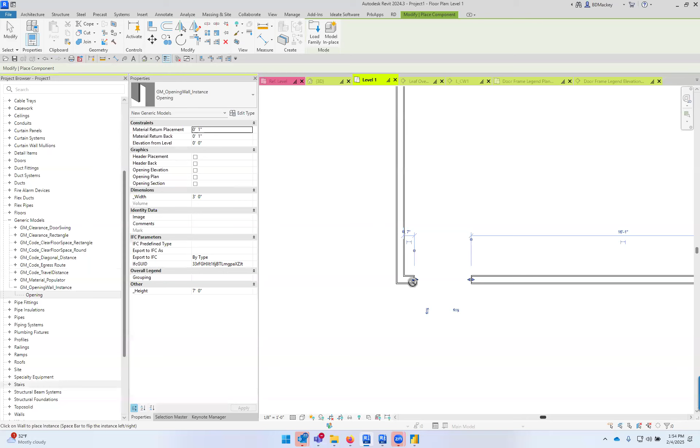If I come in here and I now have got that one, I'm like, cool, place it here, right? Let's just stretch it over to here. It will never go past this wall, right? So I cannot get that to go past because it's an opening family. I think I actually have this one in here. Let's just go up a folder.

I've had the same thing with windows, and I think I saved this one from a client. Shoot, not the corner. So I had the same thing where I had a client, nope, this is not it. I had a 90-degree window where I created a 90-degree window, but the problem is getting this other window to cut the wall that returns.

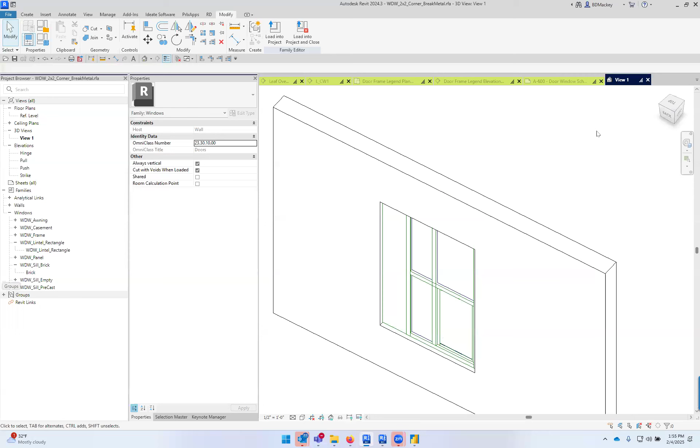That was not possible. So all I did was check cut with voids when loaded and added a void on that side. So after I placed the window, I would then use the cut tool to cut into the other wall. Since an opening will only cut the host it's hosted to or elements joined that are parallel to it, that's what I had to do. So yeah, you're never going to get this to happen. You'd have to put another opening over here or do what else you needed to do there.

Oh, and here you guys can see my wall returns on that opening family, which did the same thing. You want it on the edge of it. So you're saying you wanted this opening here, this? Confused.

Oh yeah, by the way, the one thing I will say with that wall closure, you did kind of see that sometimes it'll freak out. Like if I do the wall closure here, that's cool, but the second I take it past this wall, it completely breaks and you don't even see the layers of this wall. Great way to screw with your friends. But yeah, the wall closure is kind of finicky.

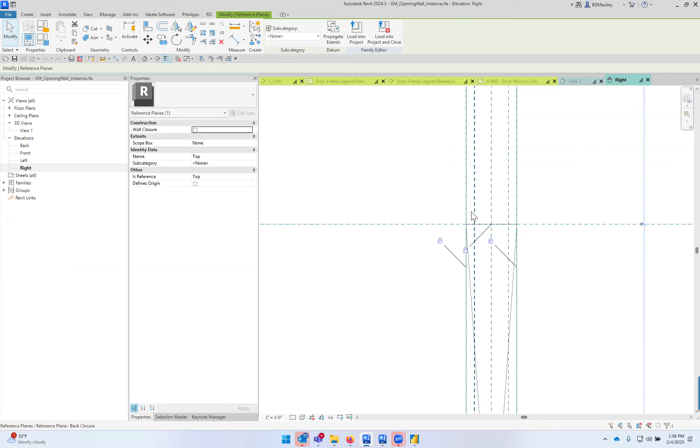I've also found that in a family, I was like, cool, I can show it in the elevation too. So in an elevation, I did a wall closure parameter so I could try to bring the gypsum board coming down. So I checked wall closure for a vertical one too. Yeah, that completely blew it up. And when I did that, you never saw any of the material at any of them. So only use the wall closure on ones you see in plan. Don't ever use it on ones you see in a section. It just does not work.

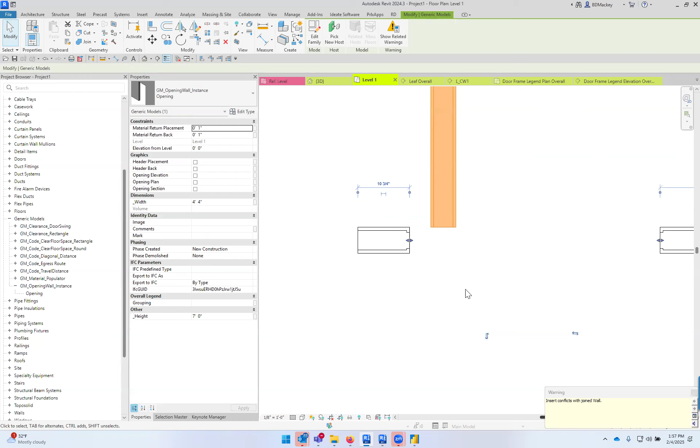Run the wall that the opening is in past the perpendicular wall. So do this and then take this past it. But you want this wall to run through? So not the opening, just the wall. So he wants it to just end right at the finish, I'm assuming. Right? Have this wall end here. I guess I'm confused. And then I feel like, yeah, I feel like that is what he wants.

Make my wall closure 0. And if you're seeing something like this, it could be an issue, but you might be able to go in on that one and do a miter wall cleanup. I don't use these that often. This wall join, no, it's not even gonna let me miter it. Miter it before I put the opening in.

All right, I'm getting tired of selecting the opening. Turn my damn dash line on. Oh, because I constrained it. Stupid. I hate that. I love the align with the lock when I'm in families, but it screws me so bad when I switch over to projects. Anyway. Yes, I know. Unjoin, trim these back together.

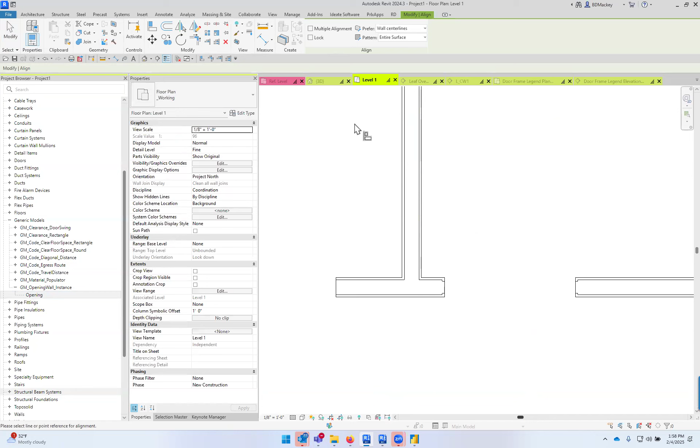So yeah, keep the wall going past, and then just do the opening right up to the finish. Keep the wall going past and then just do the opening like this. Yeah, and then align but without a lock. And again, even with my little thing here with my 1 inch, oftentimes on one like this, I'm gonna want this to show the gypsum board running through. So usually I'll make one side 0 and then the other side something like a foot. So then it even looks like my gypsum board runs through in this case.

Still see a line here, and it's not going to render that way in like Enscape. Well, yeah, yours isn't working like this, Rick, because you created your own family. I'm hoping it's not the one I gave you. Try playing with that wall closure. If it's not working, make sure those wall closure values.

It's yours, broken. Yeah, and the wall closure checkboxes only work if you started with the door template. So even though this is a generic model, I did not start with the generic model wall hosted. I started with the door template, deleted everything out of there, and then switched it to a generic model. So thank you for pointing that out, Philip. You only get the wall closure tick boxes if it's the door or window family.

Yeah, so that should work, Rick. I do this one all the time. And it's mine. Damn it. Yeah, not sure if it should work. I do this all the time and have been for a decade.

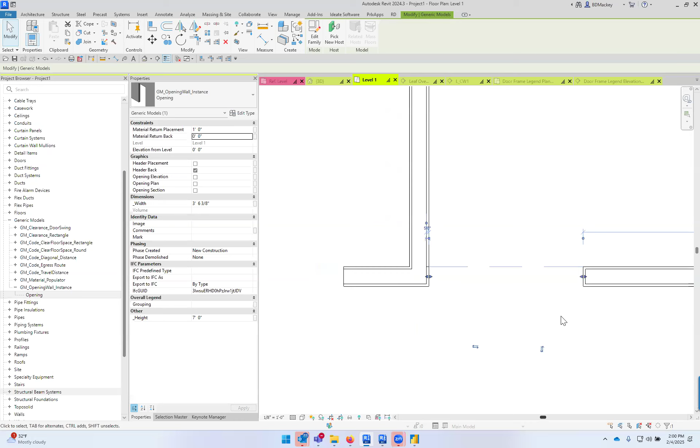See what I meant about that wall closure at an opening? You can start to like, oh, okay, that freaked it out. Let's switch that value to 1 and that value to 0, and then all of a sudden it stops freaking it out. So I know that wall closure is freaky when you start getting into certain things. Somebody flips it and all of a sudden you're like, why is my wall always in coarse mode? Yeah.

I feel seen with Philip's comment that he had to learn the hard way. So when I realized what that was with doors, and I realized you didn't get that everywhere else, I went back and recreated a crap ton of families. Cause I'm like, yeah, I want that wall closure on all my openings, and on anything. So for me, my wall-based generic model template, that is my template. I literally took it from the door template and created my own generic model template. So now I have that for every wall-hosted generic model template.

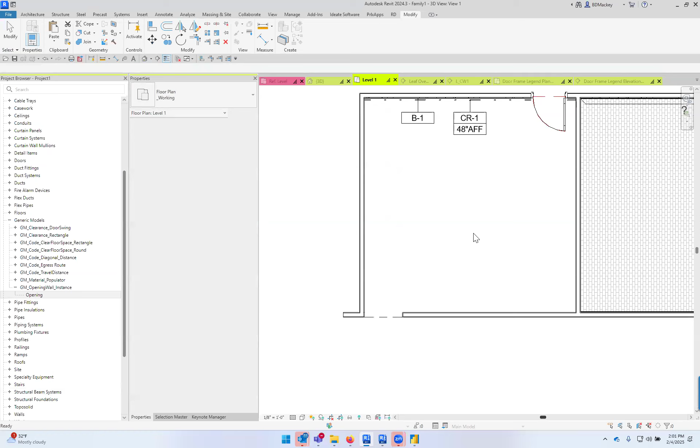Because like I said, if I go file, new family, right? And we just say generic model wall-based. This is out of the box. Your reference planes do not get a tick box for wall. Oh, it does get a tick box now for wall closure. Ooh, did they change it? They might have changed it at some point in time.

Oh, but what you don't get is the other option. That's what it was. You don't get the option like my doors. So when I go to my doors or my windows, I don't need you. I've got too much stuff open. So like my doors and windows, I can say edit type, and then I can actually get the wall closure value here. You only get that with doors and windows. So just FYI. So yeah, on my template, I started with a door. Even my window template, I took that one, saved it as window, took that one, saved it as generic model wall based.

Cool. So what else? What else we got? All right. Let's see.

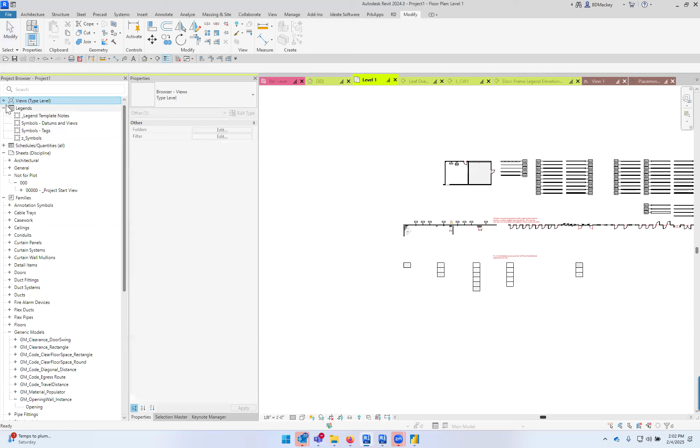Getting first floor to read 100 feet relative to the project base point, whether an antiquated standard or not. I've seen some that leave the project base point at the internal origin and then locate or move first floor up 100 feet. Others leave first floor running through the internal origin and move the project base point down 100 feet. There may be other methods, but these two seem most common. How would you do it?

Yeah, so for me, my level 100, it truly is at 100. My project base point is still at 0. So when I go into a section and look, my project base point, obviously at the beginning of a project, my survey point, it's all there. I want this internal origin all to be on top of each other when I start. I'll move the levels up and down.

I don't agree with the, hey, let's go move this up 100, change that elevation to be 100 on that project base point, and do it that way. Because you can see I did that and it moved and now I'm at 0, but I don't like that to be there. And I know there's some different scenarios on it.

Part of the reason I don't like it to do that is I like it to be on the internal origin, right? If I go redo that again, right? My internal origin is down here. I think the project base point should be at the internal origin. I know when we start taking things into Rhino, into other programs, it doesn't give a shit what your project base point is. It looks off this internal origin.

So in my mind, that project base point should always be at the origin because as we communicate to Rhino, to RISA, to RAM, to any other program out there, it doesn't care about your project base point. Don't care. It cares about your internal origin. So I want those two to line up. So my level 1 just says level 100.

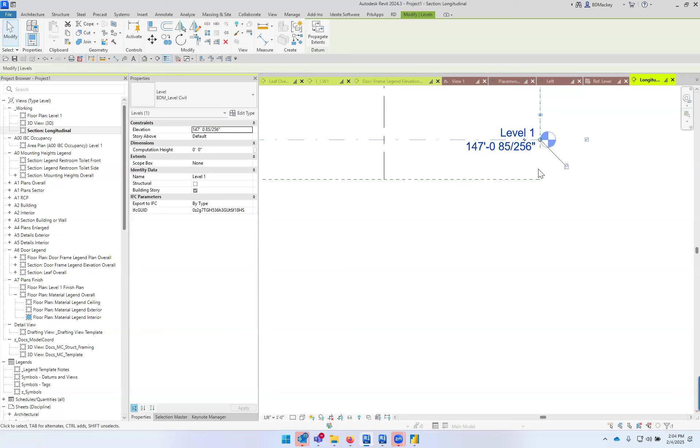I then do have different civil elevations, right? So I had this inside of here. So if my survey point had been moved or whatever, then this is going to pick up on what that is. So I do have my civil elevations, that's broken, that should be decimal feet, not fractional feet. But I do have my civil elevation working inside of here, which goes off of the survey point and then my project base point. So this is going to be reading 100. So that's how I set it up.

I know I've seen people do it both ways. I just understand that every time I'm communicating with somebody else, it looks at the internal origin, and that's what I like to see. So hopefully, Jeremy, that answers your question.

You answered it without the dreaded shared coordinates word.

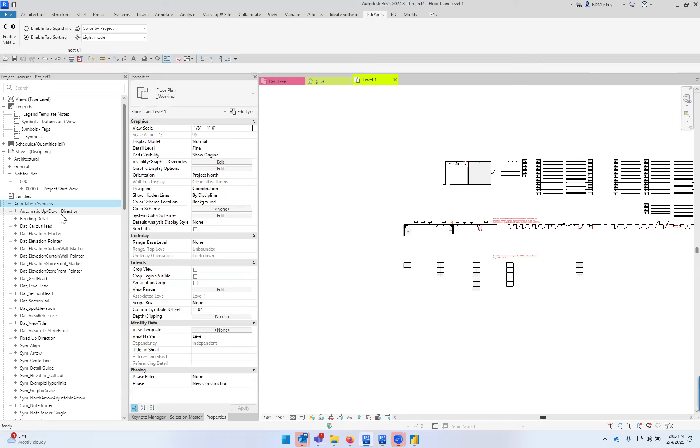All right. Well, looks like we've got one more, and it is on graphic scales. So, do you have recommendations on making graphic scale families? Do you have nested families for scales, or just have inputs for the numbers and distances? Yes, I have both. I do know when the Revit 24 sample project came out, there is a graphic scale inside of there. I personally disagree with it a little bit. Paul Aubin gave that one.

Mine is slightly different. So my graphic scale, which I can't imagine is actually loaded in here, it actually is. So when I look at the type properties, yes, I have one for all the different sizes, but mine is flexible enough that it lets you do whatever you needed to do there. So I have base value, first value, second, third, fourth, and fifth value, right? And what you put inside of here is what is going to be displayed.

Sure, I broke something. But it's what is going to be displayed, and that's actually what's going to scale everything. So when I'm like, I need a 16th or a 3/32, I can go through and set that up. How I'm doing this also is I have a scale factor. So as you change from 1/4 inch to 1/8 inch to whatever, you need to know what the scale factor is. I said this to somebody recently, and they're like, I don't know what you mean.

What's a scale factor? For all of us old AutoCAD users, you had to know what the scale factor was. You're like, man, I need my text to print at 3/32, but I'm in this scale. You had to take that scale factor and make your text the right height. All of us old CAD users had a little cheat sheet taped to our monitors. Melissa's like, I still have that. That said, if you've got this scale, this is the scale factor, and here's what your text needs to be. But most people don't know.

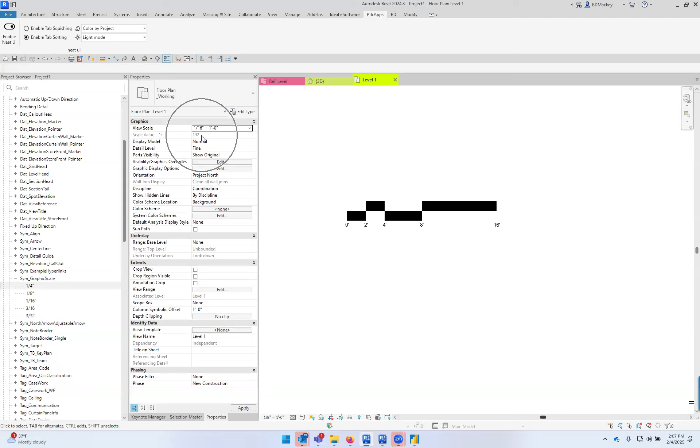So my family basically does, yeah, I just changed my scale to 1 to 60. My family will basically do that same thing. So you get at the type, you're going to tell it what values you want here, and then it's going to display those values, change the length based off of that scale. But you'll notice that I'm not seeing like 2 feet 0 inches, 4 feet 0 inches. Some of my clients don't even like to see the feet, so we can get rid of that.

But also what's cool is like right now, you'll see that the fourth visible is gone because if you make one of these values 0, it automatically turns it off. So if I get rid of that one and say apply, then that one just disappears, right? Also, if you didn't want the first value, you have a lot of clients who don't like to see a 0, I can turn that off too.

Cool. So how this is made is it's made with the nested families only because the only way to control where a text location is, you can't do that off of a label. You nest in a family. So I've got a family called Sym length TC for top center. I nest that in. And this is actually one looking at a length value. So if I edit this label, this is literally just a label inside of here, but it's not a text label. This is literally a length value. So it's a parameter that's just a length value that's a sample.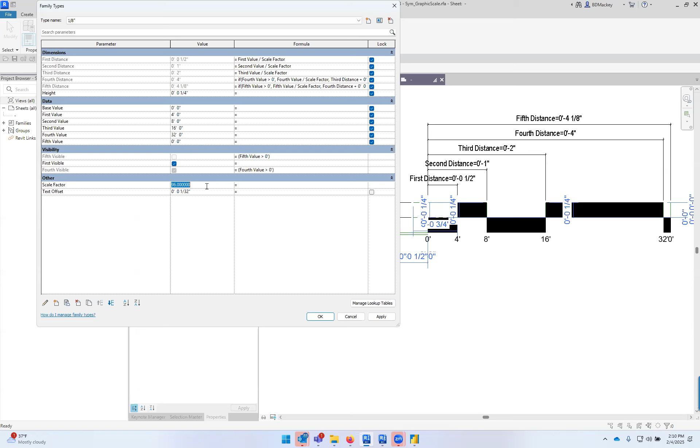The shaded part is just a filled region. Yeah, I didn't have to go into nesting this as a family. It's literally just a filled region that is aligned and locked to all the different reference lines or planes. I forget what I used here. God, this is a really old family because my units still have feet in there. This is usually just fractional inches, so I don't get the zeros in there. Man, this is a really old family. I probably created this like 20 years ago. So just filled regions, all associated to the reference lines, et cetera.

And again, these here. Oh, and then the only other thing on that too is in that family, I believe I have a units formatting on here. So if you grab a length value, I believe I said, yeah, to the nearest foot. So if for some reason somebody typed in 1.5 feet, it's only going to display 1. So you could put in stupid things for the scaling, but it's not going to actually display that because I have it rounding to the nearest foot.

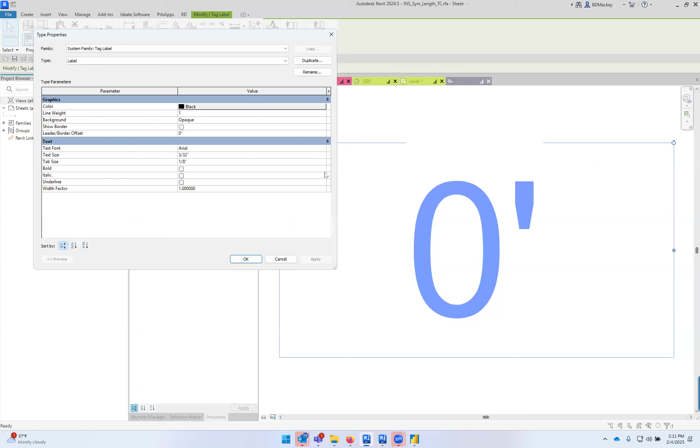And then if you also didn't want to see the foot mark, you edit, oops, not this, you edit this, and in that formatting, you can come down here and say, cool, get rid of the units. Oh, I can't get rid of the units format. I thought I could. Maybe not. Maybe I lied. Maybe you can't get rid of the foot mark. I thought I had done it in one of them, but so that's it. Nested family for this, mostly just filled regions. But the key thing for me is obviously formulas and then the scale factor.

No, Rick said, and your view will tell you what the scale factor is. Sorry, just saw Rick's comment. So that's it for me. And literally, I have this one, and one of my clients were like, that's cool, I need a 1 to 400 or whatever the heck it was. I'm like, great. Go change your view to be whatever scale that was. I have no idea what that scale factor is. Cancel. So now you know the scale factor is 4800.

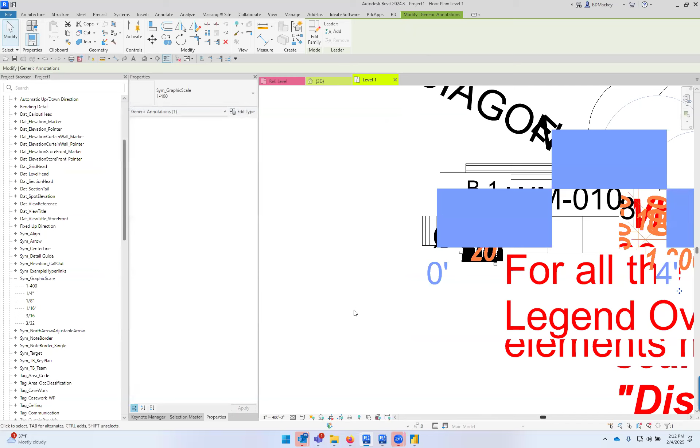So then when you go to create this, you can go in, edit type, duplicate this, give me a 1 to 400, and then change my scale factor. What the hell did I say it was? 42,000, 4,200? I don't remember what it was. And then it will change. Yeah, it's probably going to blow up on me, but it will change all those values accordingly. I've never went to a 1 to 400 scale, but if you're using a 1 to 400 scale, you got problems. I know.

Personally, as a person who started off way back in construction, I never ever looked at a scale factor. I would always go to a commercial door and throw my scale on it, because a commercial door is 3 feet. I'm not going to rely on somebody to put a scale factor down. That's a 3 foot door. That's my scale factor right there. That shows 3 feet on my scale. I've always personally thought scale factors were pointless.

Those are meant to be placed on a view, not a sheet. You can put those wherever you want. My personal theory is I usually put almost everything in the view. They can go either or as long as you know what it is. But yes, I put them in a view because I don't believe anything should get placed on sheets, because sheets are merely placeholders for views. I don't like to blur that line and have people start saying, well, I needed to put this. I'm just going to put text on the sheet now. It's like, no, we have legends for that. I want to put revision clouds on the sheet. No, you do that in the views. So my theory is everything goes into it.

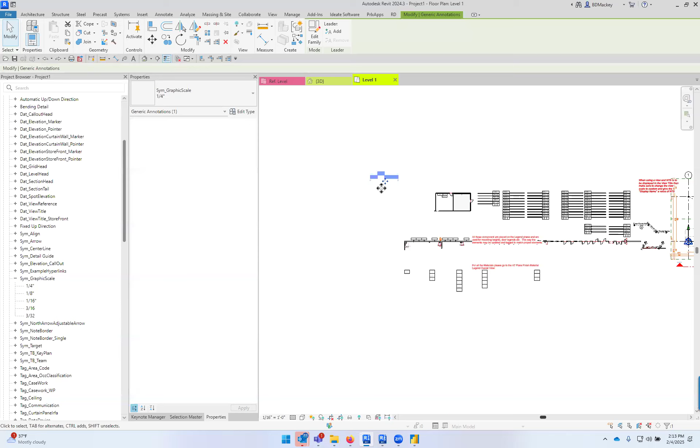Honest truth, usually for me, this gets nested either into view titles for clients who use it or possibly even title blocks. I don't see too many clients actually manually putting these down on every single view or on the sheet for every single viewport. But that's up to you guys. I personally think they're completely pointless, especially since everybody looks at it in PDF format and we can scale things in PDFs. So I'm going to go calibrate my PDF to be that way.

Somebody puts it on every detail. Oh my God, no, because I need to use a scale when I'm looking at a detail of waterproofing where everything's drawn oversized and spaced apart. Yeah, no. And then your note says do not scale. Exactly, that's what I was going to say. That's what they usually have. Don't scale these drawings, but here's a graphical scale for you to not use. Mixed messages for drawings.

Sure. Yeah, and I kind of understand it for larger scale plans like landscape plans, et cetera. People are trying to look at it and they want to know what's going on in there. I kind of get it for that too. But I think on 1/8 inch scale floor plans or anything else, as an end user for 10 years, I never once looked at the scale factor somebody put on there. I would go to a door. It's 3 feet. I'm done.

But yeah, old school principle. Yep. But look, that way when you're in Bluebeam and you're going to calibrate, you have something to calibrate off of, not an actual dimension string or anything. You can actually use that scale. I don't know.

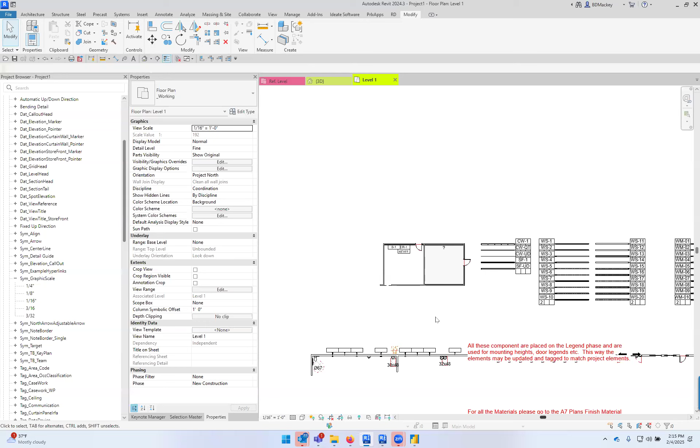I think that a lot of people creating the standards are the people who haven't been around technology and they're still creating these standards off of pencil days. And it's like, guys, give it up. We stopped pencils 40 years ago.

Yeah, North arrow on every single view. I have clients who do that too, and it cracks me up. I actually have one client, they actually have a void family, and especially with topography now, so you should have a building pad, and they'd do a building pad into their site itself. So anywhere they were, you would just see the building pad, and it would cut down into the topography. So they're like, we don't care.

There's our north arrow. If you want to see it, just turn the damn building pads on, and you will actually see the north arrow. So I thought it was hilarious. That was their north arrow. It was just the damn building pad. Okay. But it still looks like our CAD standards. Yeah.

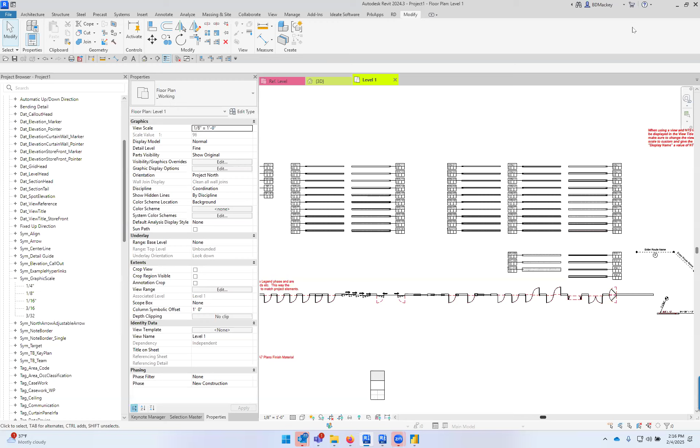Yeah, everybody knows. I have a question for people in here because I had this discussion in civil chat today too. First off, how many people are actually starting to put color in their views? I'm just curious. I mean, yes, I'm 100% a color in the view person. Because, like I said, printing in color to printing in black and white, not that much cost difference like we used to have in pen plotter days. Second thing on that is most people are looking at this in PDF form. Like for me, absolutely all of my code plans are.

Like, yeah, cool, this is a smoke barrier or this is a fire barrier or whatever this needs to be, those get color coded differently. All my door clearances are red. I print them that way, right? That's just kind of what's going on. The other thing that I've started adding, and I haven't sold this to a single client yet.

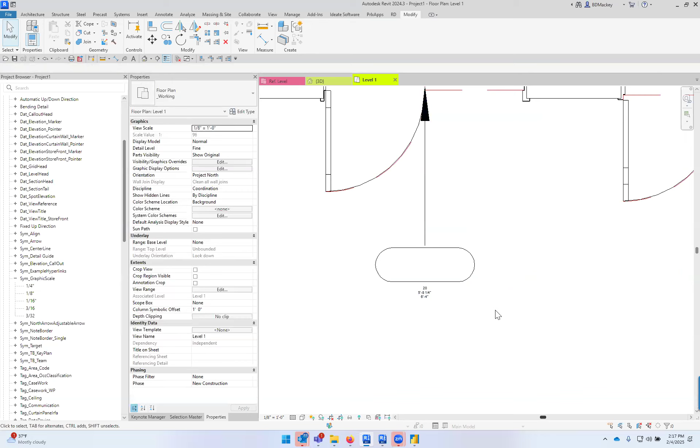But like for me, I have a tag, and in my door, if I come tag this door, I have a specific door tag now that I am actually calling my QA door tag, which will get into all the additional data, right? This is a 20-minute door. Here's the actual opening. Here's the height of the door, or actually the overall frame of the door. Because again, most people are using PDFs. You have infinite zoom on PDFs. I don't care if when you print that, that's not really legible, but everybody has infinite zoom.

I got tired in my working views, like, shit, is that a 20-minute door? Let me grab that door. Let me scroll down to the properties. Yeah, that's a 20-minute door. Shoot, that's a 20-minute door. I can see it. I can look at all of my doors and start seeing what they are there.

So for me, I've absolutely started even creating tags that have additional data that the contractor might use and putting those in my drawings. Because tell you what, as a contractor, it's much nicer to say, shit, that's a 20-minute door and seeing it right here rather than having to go flip to a door schedule. I'm looking for door 1,342. Next page to the next page. Oh, that's this door with this and this and this. I don't know. The data's all there. Why don't we start using it more?

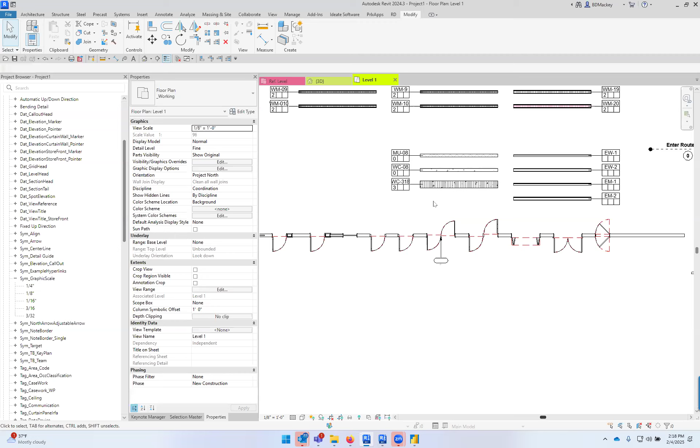Yeah, see, everybody likes that. That's hilarious. Dan saying we have a contractor who's only using PDF. And right after that, Rick's like, our contractors only look at the paper printouts. And that's great. If they're only looking at the paper printouts, that's their prerogative. But on larger projects, guarantee they have PDFs or some sort of access to get it. And I'm not saying the data is not there.

I do try to choose colors that print differently, and I have a tag that will tell me this is a smoke barrier, fire barrier. But it's just so much nicer if I'm in the PDF form to not have to say, cool, let me go over to the legend. What does this hatch pattern mean? Okay, cool. Let me come back over here and look at the wall. Just do it all. I don't know. Kind of come talk to your bosses.

But the partition tags taking up too much space. These are my partition tags for code plans, basically. I don't really care about all of this different data on non-code plans. I don't need to know the STC, the smoke barrier, the fire barrier, all of that stuff here. So usually I have different tags. One tag that is going to be for code plans, and other tags that are just here's your typical wall type. Here you go. Yes, colorblind folks.

I have a colorblind child, and I actually worked with a coworker way back when we had to take the Revit certification tests as Autodesk resellers. They'd always be like, "Tell me what the object in red is." I had to sit next to the coworker to tell him which object was highlighted in red because he could not tell the difference between black and red. So we literally had to sit there and proctor his test and tell him, "Dude, that's the red one." They were horrible for that.

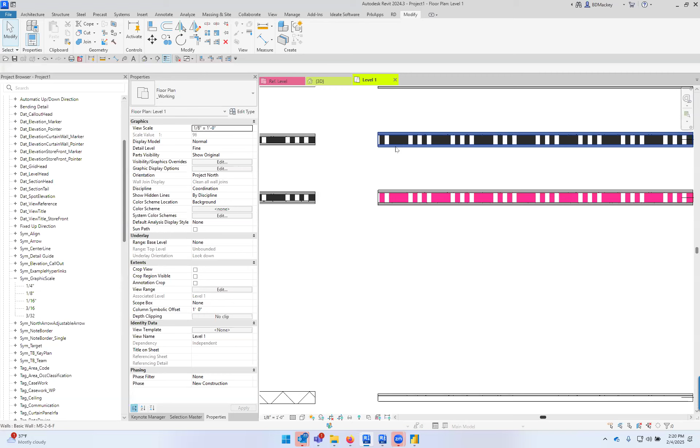So I learned with a colorblind child and a colorblind coworker that, this is a horrible example, the pink into the black, they're probably not going to be able to see that. I'm also, like you guys saw on my door sheet, why not start putting more schedules on more sheets? Too many times people are in that old mindset of we'll only show the data in one location because we don't want to have to track that data down. Well, if it's true data, you don't ever have to track it down, right?

Well, there is extra work. I'm not gonna say there's no extra work. You don't have to track it down. You have to make sure people are putting the tags in the elevation, they put those tags in the right location, they're not covering a card reader or something stupid. So there is work, but there's no extra work to verify that it's correct, right?

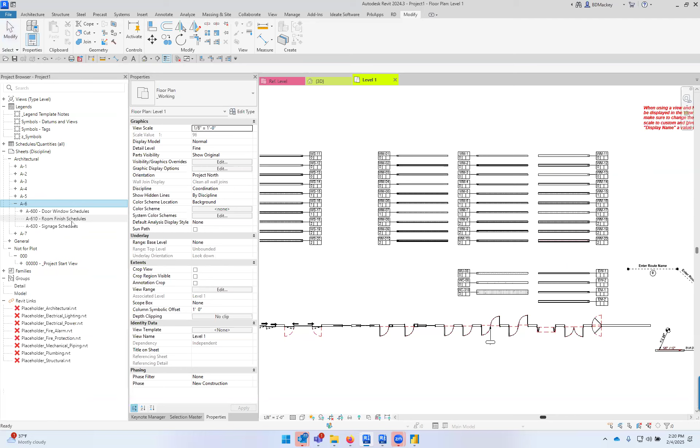The whole reason that door sheet came about is I have one of my clients who works closely with the contractors, and I was showing those door schedules, and he's like, well, it's Revit, all of the data is there in plan. Why don't I just put this in the plan? I'm like, that's a brilliant idea. That was like 15 years ago. So I started doing that.

Then Autodesk also gave us the capability in schedules to filter schedules per sheet. If I go into my filter, I can filter schedules by sheets. I will now put a door schedule on every damn floor plan. And guess what? All of the data is there. It might be a more simplified schedule, but why not put a door schedule or a room schedule on every plan if you have the space, because the data is going to be there and it's one schedule. I'm not creating 500 different schedules. It's one schedule filtering it by sheet. So that was my theory.

But all right, I just realized I went 20 minutes over as people are saying gotta run. It happens. Technically I had a meeting I was supposed to be at 20 minutes ago, but that's okay. So yeah, I don't know.

Just things to think about when you're talking to these people who are like, you've got to use pen weights and you've got to set this up because we always did. Just start mentioning other things. Because they definitely won't be able to build it.

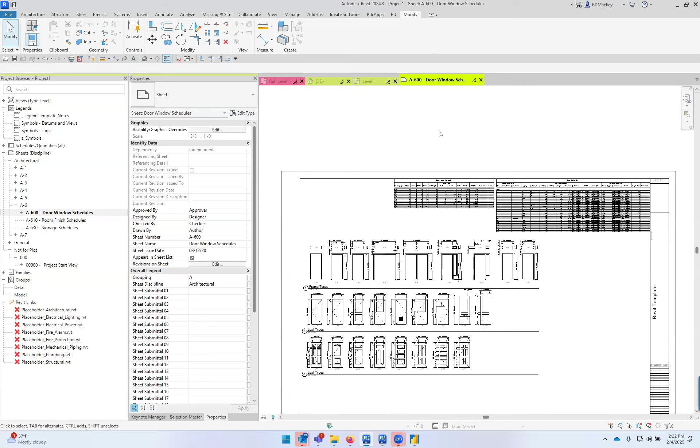Yeah, I also keep wondering why we have paper sizes. One of my clients did a project that was so large they were using 36 by 48 sheets at 1/8 inch scale. They had 72 sector plans. It was the Miami Beach Convention Center. I would rather have one giant plan that I could pan and zoom in than 72 different sector plans, having to bounce all over the place. Granted, I know we still have to print it for a lot of jurisdictions, but it's kind of like, why do we even have sheet sizes anymore? Everybody get digital and sheet sizes will be a thing of the past.